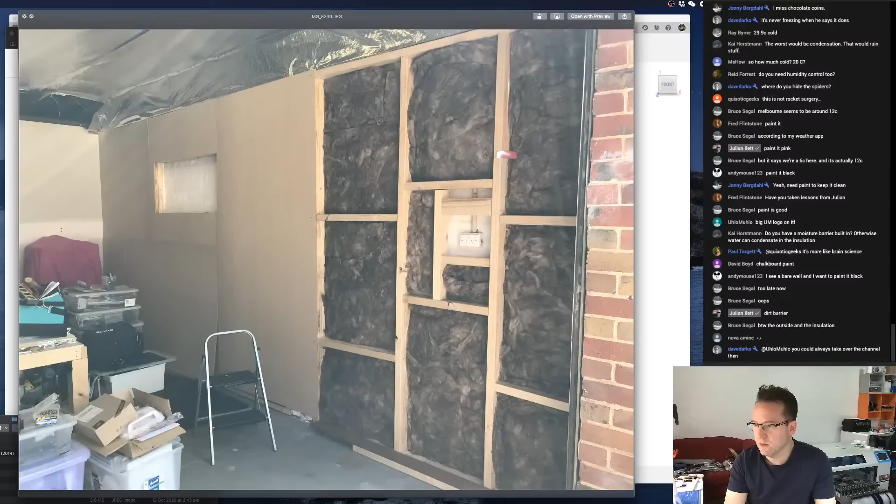So this shelf here was covered with spider webs and spiders. So what I did is Sunday morning I pulled everything off this shelf. It was a pretty big shelf. But before I did, I took out the Mortein. I don't know what you call it overseas. You know, the spray for killing spiders and bugs and stuff. And I gave this shelf a full-on spray down. Even with gloves, there was no way I was going in there without spraying it all first. Anyway, yes, like Raid.

Yeah, so we found one redback in my hammer drill container. I pulled out my hammer drill, opened it up, and there was a nice redback in there. So that was pretty cool. He got squished quickly. Yeah, I don't like spiders at all. Spiders and snakes, don't like them. Okay, anyway, so the renovation is happening. Very exciting. It's underway. Okay, let's talk rockets.

Do you have poisonous spiders in Melbourne, like funnel web spiders in Sydney? Yeah, we have the same spiders. And not all spiders are deadly, I should say. What noise does Sion make when a spider crawls out of his sleeve? Oh, yeah, okay. Your memory's too good, Mark. Too good. I don't love snakes. No.

So anyway, the issue I had with this was it can't run off coin cells because it needs more power. And so we were stumbling on how to power it, right? And I was originally, so let me just show you something. So this is a, oops, didn't mean to leave that on. So this is a newer design, but originally I was looking at maybe Rocket Lab.

Yeah, I'm pretty sure I'd have to pay to get someone to send the Charmhigh to the moon, and I really don't want to invest any money in that, to be honest.

So originally I was looking at how I could fit maybe 3 AA batteries or AAA batteries into it with little holders and stuff, but it was pretty ugly. It wasn't a great solution. And then someone on the stream ages ago mentioned the CR123s, which is this guy. And so I went out and bought some 2 years ago. And I'm pretty sure they probably are dead now. I don't know how long they last for in the pack.

Is there a date on them? Is there a use by? Can't seem to find a use by. Anyway, they've never been opened. So these batteries are 3 volts. They're not cheap batteries, unfortunately, but they're a good sized battery. And so one of the problems with doing the AAs or the AAAs,

what does John Meeking say? WOPR linked launching. Yeah, I could do a fake WOPR launching. I hate them batteries, had them in a home automation system. They died way too quickly.

I guess what they're being, bottom left. Bottom left? Is that, no, that's 1217. Yeah, I don't think those, oh, maybe. Okay. 2027? Okay, maybe. Okay, yeah, okay, yeah, 2027, 12/27.

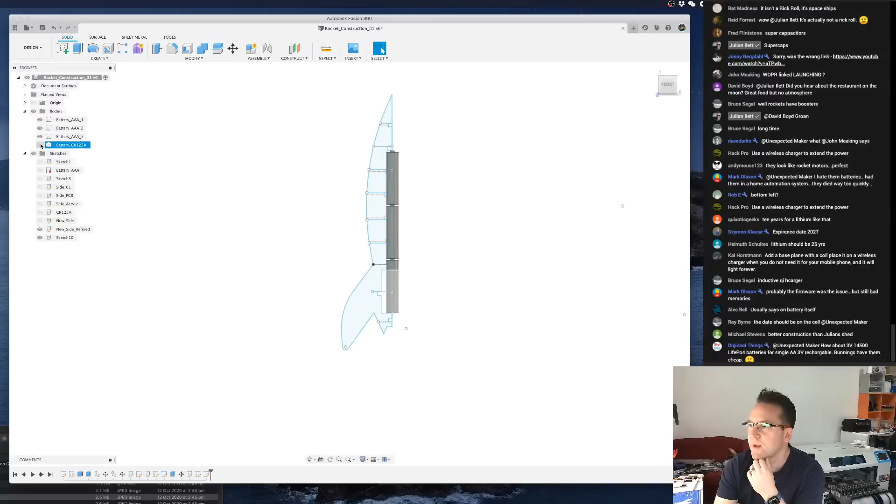Okay, cool. So one of the problems with doing the AAs or AAAs is that the weight of the rocket would have been bad. It would have been possibly too easy to tip over. So what I liked about doing the 123 is that it would be bottom weighted and much easier to build a holder for it. So what I've designed is this. This is the new piece that I designed, which I never laser cut, and I never finished because I got distracted.

Surprise, surprise. How about 3 volt 14500 LiFePO4 batteries for single AA 3 volt rechargeable? So I said again, a 3 volt. Are the 14500s AA in size, are they?

I mean, I don't want to put a charge circuit on this necessarily. I don't know. Look, we'll see. We'll see. Right now, I just want to build. I want to get this finished at least as a version 1 prototype.

So my plan on the stream today is to turn this into a 3D model to kind of show everyone how it's going to work. Because one of the challenges I had, let me just switch over to here, is that having the pieces on the outside that slide in, like this, makes it quite hard to put together. This is my original type of design. Makes it hard to put together. And you kind of have to glue them because otherwise they keep falling off. Then once you glue it, you can't change the battery.

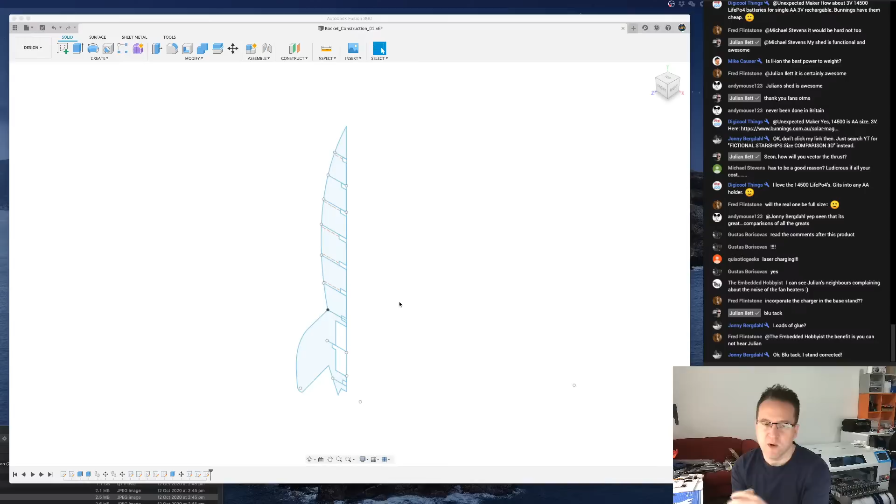Now, PCBs, you can get up to 2mm in thickness. My plan was to build this out of 2mm acrylic so I can simulate a 2mm PCB and then do 3mm cross sections. I don't want people to glue it because then you can't pull it apart to change the battery. That's the problem. So I need to see how I can construct this. So let's start off with... it's a bit of a messy project, but whatever.

So I want that to be in the center. What happened there? I did not hit the wrong key. Okay. So I want to start off by just extruding this out 1mm that way, because I want it to be in the center. So that's a lazy way of doing that. Hey Aaron. By the way, my Fusion 360 skills are not great, so please no one take down notes to learn from this. Okay? Just saying. And that's a rocket slice one, except I can't spell.

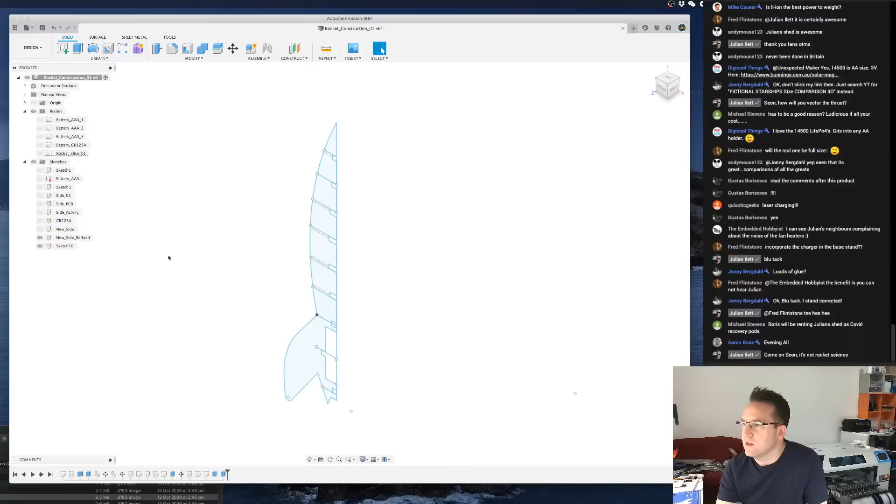Okay, so let's just hide that for a moment. Now, these lines are designed to build the cross sections from. So it's a bit of a pain, but the idea is I can build a circle and then I can rotate it. Come on. And these are going to be my cross sections.

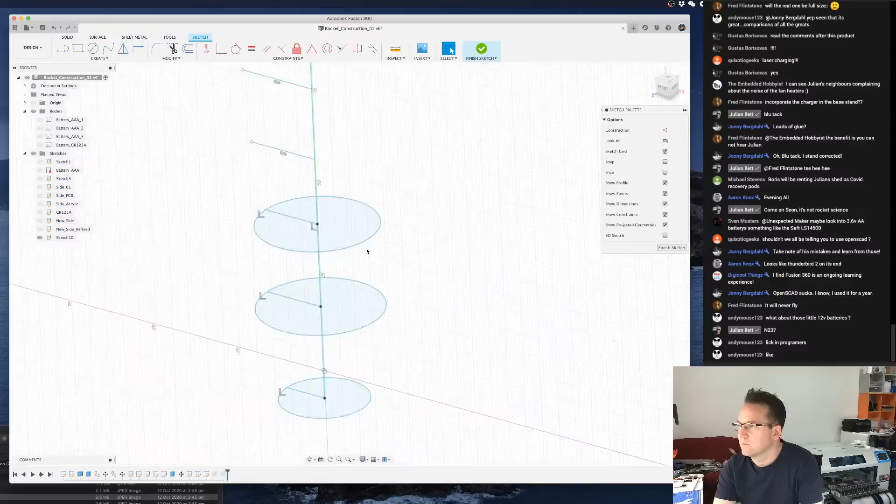Maybe look at 3.6 volt AA batteries, something like the Saft LS14500. They need to be easily found, easily sourced batteries. Like if it becomes either really expensive to replace the batteries or really hard to find the batteries for these, then I don't see why people would care about getting one if it's a hassle. You know what I mean? It needs a gimbal, and no, it's not designed to fly. Would standard 18650 lipos be too big? I'd say so. I think that'd be too big.

Now, I could have done all this already and just shown everyone. Yeah, I'm not going to be using capacitors, no. They've got to be safe. This is designed to go in a kid's room on a bookshelf. You'll also be able to power it from USB as well. But not everyone's going to have power nearby. And it might just turn out that I only have USB power. I don't know. But I'm not going to know until I actually finally get one of these together.

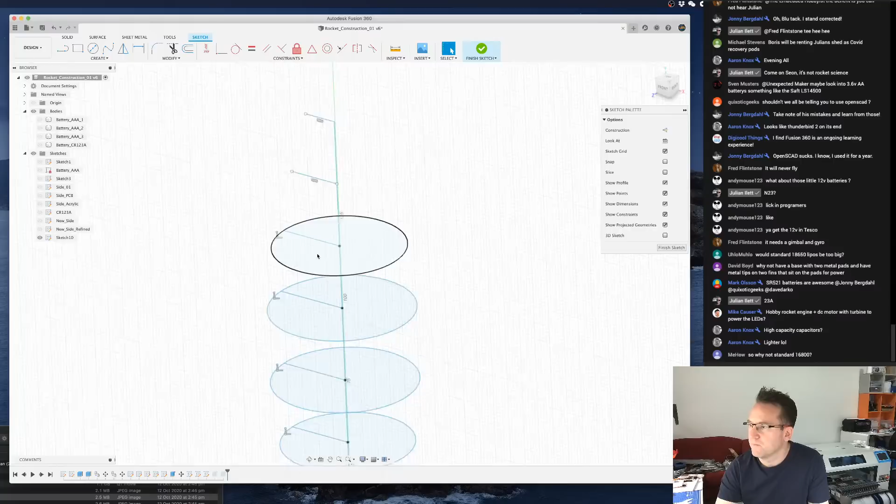So these are all the cross sections, as I keep saying. And I'll show you why I did the lines like I did in a moment, and why I'm building it this way.

Okay, so they're the cross sections for the rocket. And they're designed to be on the shortest side. So these ones on the low side, because that's the shortest point, so that way it doesn't stick out the edge. And these ones are on the high side, so it doesn't stick out the edge, if that makes sense, right? So these need to get extruded down, and these need to get extruded up. And they're 3mm. And this one here is in the middle because that's the shortest edge.

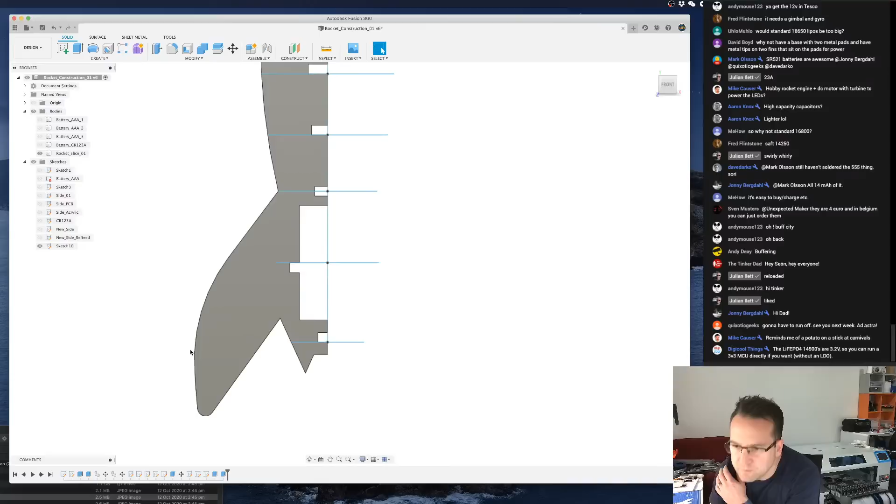Well, I'm going to be using a tiny 85 or a tiny something, so it doesn't. I don't need an LDO anyway because I've got a full voltage range, so that's not a problem.

Building in Southampton. Okay. They do rocket buildings.

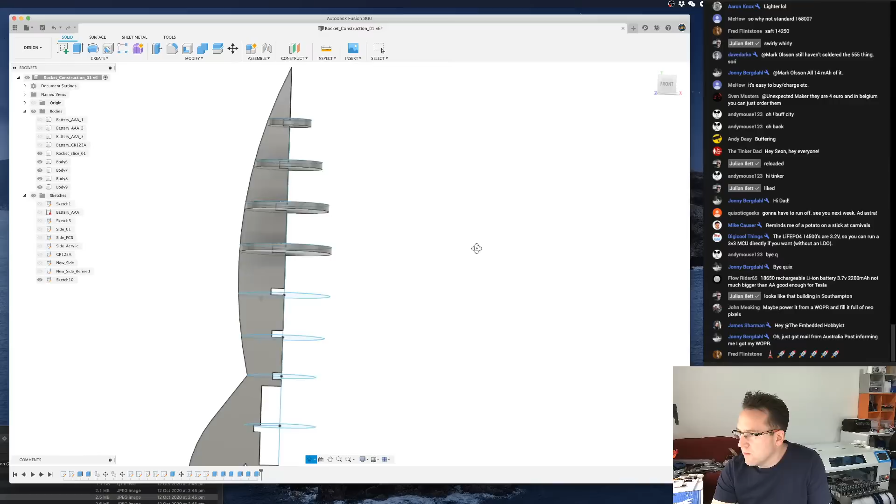Okay, so this needs to be extruded down. -3. Yes, stay on. Can I multi-select and extrude? Actually, I think these two need to go down. No, I can't. Didn't think so. Extrude, -3. Extrude, -3. Now these ones are up, up, up. So 2 ups.

This one is up and down. Extrude 1.5. Extrude 1.5. And wait, what just happened? Oh, I did negative. Extrude negative. Hello. Extrude -1.5. Right, that's better. Sorry about that. This one is down and that one is up. Extrude -3 and extrude 3.

Hope you start a serial MP3 project without an SD card. I'm waiting for this product impatiently. Well, I'm not sure why you're relying on me for that.

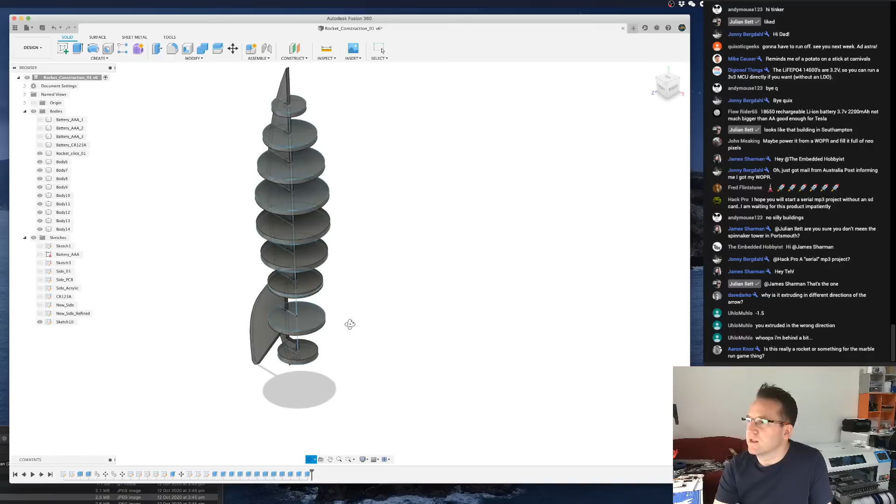Okay, so they're the cross sections. So the idea would be that we just turn all these off for the moment. I should name them, but that's okay. So we do a pattern, circular pattern. Axis is going to be this, that, and we want 3 of them. Is that 3? Oh wow, look at that. Yay.

So turn my sketches off. Okay, so the idea is the rocket will look like this, right? And hopefully I've left enough room so they don't... Oh, I haven't. Right, I'll have to shave them back a bit because they're too close into each other.

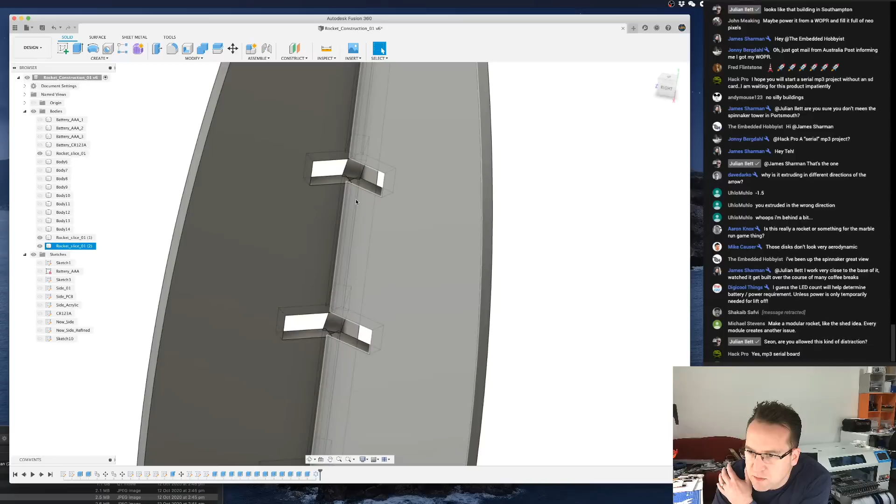Am I allowed this type of distraction? Which distraction? Is this a licensed copy of Fusion 360? Yes, it is. As you can see over here, there's my little... I am licensed. Sorry, I'm missing something. If you need, just at me. Remember to at me if you need. Yep.

Yeah. 3D Christmas tree. It's going to be a little bit small for a 3D Christmas tree. And so the battery fits in here. Oops. In here. And the idea is, well, let me show you. Okay, so I'm just going to turn these rocket slices off for the moment. Can I move you down here? Okay, so they're the rocket slices. Now, this one is for the battery. So the idea is that this ring would sit around the battery.

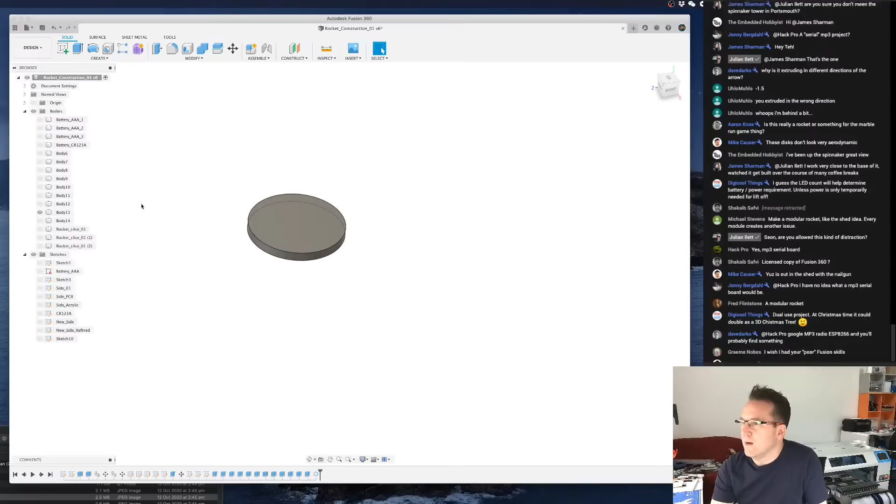I've lost my train of thought. You wish you... Hey, Graeme. Oh, no, my Fusion skills are pretty bad. They're pretty basic.

Okay, let's take a step back. So, the idea is that... I've got to remember how to do this. How do I do a boolean? I don't want to do a combine. Can I do a negative combine? Join. I want to cut. So the target body is this one, just to show you, right? And the tool bodies are that, and that. And I want to keep the tools.

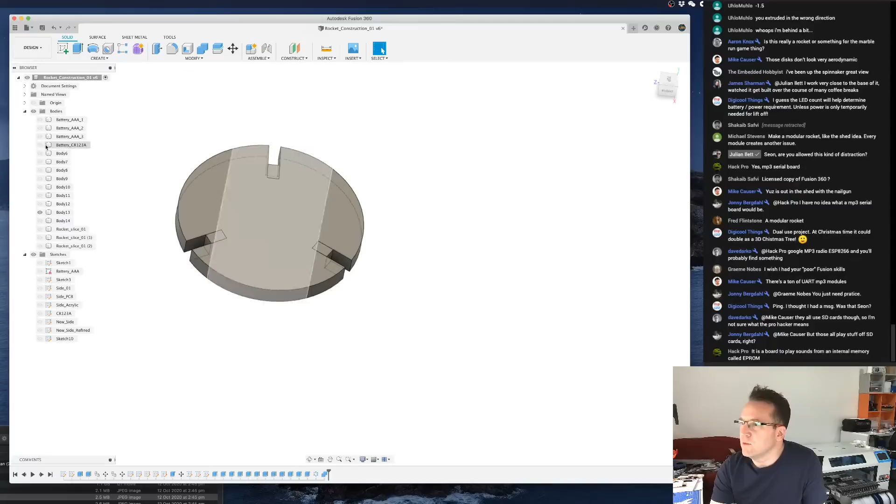Okay, so now I have this shape here. So obviously, I was a little bit out on one of my lines. That's okay. So the idea is that this would sit like this. Let's do that again. My target is this, and my tool is this. So that would be the shape where the battery sits, and the rocket bits slide in to the sides like this, around it. And the battery sits in the middle, so it holds the battery in place.

And what I do on the PCB, so one of these is, let me just, hang on, make this easy for now. Hit A for appearance, and I'm going to, plastic, what plastics have I got?

Where's my colored plastic? Here we go. So, ooh, FR4 is a plastic, it's not plastic. So if I made, just for argument's sake, if that's the PCB, and I'll make the other bits black for now, okay? Just so we can easily see.

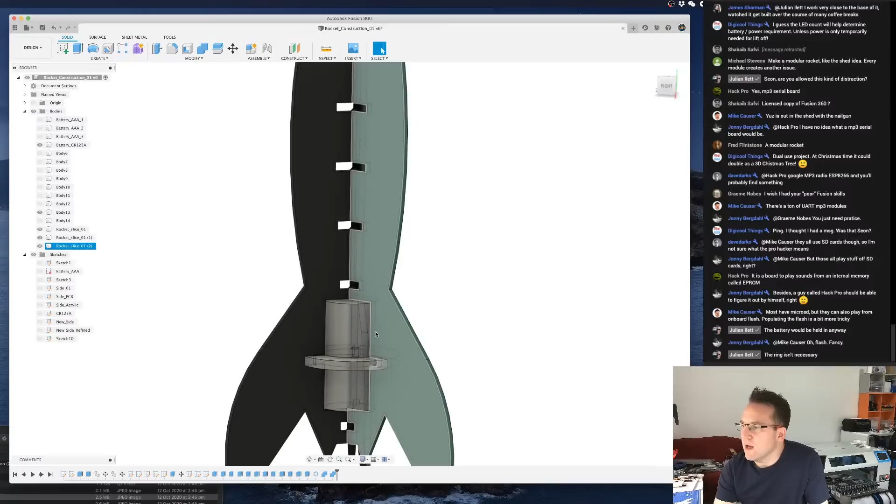The ring isn't necessary. It's necessary in terms of holding the rocket together. It's not so much about holding the battery. Yeah, you'd have to dismantle it to change the battery, which is why it can't be glued together, right? So the idea would be that on the... so that's rocket slice 3 PCB.

This one's the PCB. So the idea is that on the PCB version, right, I'd have something here that would have contact for the battery. So it could be something you solder on. Bad idea. So you would have to... Why is it a bad idea? Not wrapping the rocket.

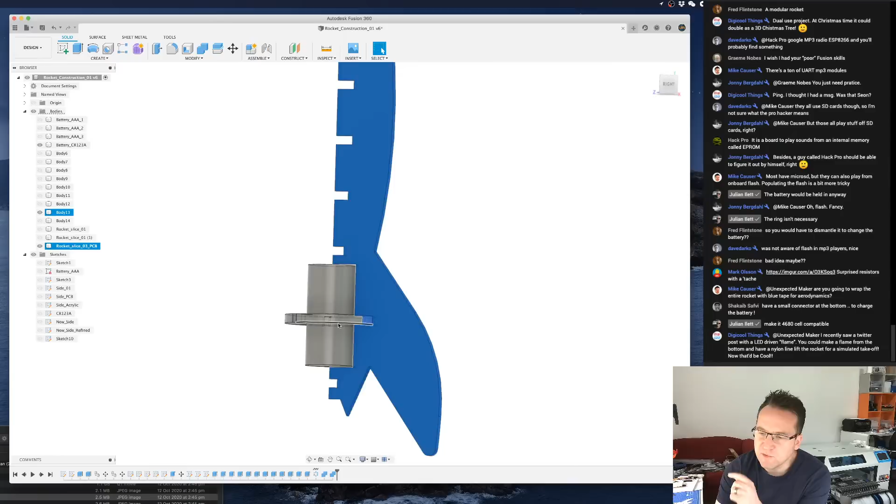So depending on what battery I put in there, if I end up putting a rechargeable battery, sure, then it can just be charged. I'll have a look at those batteries that Greg showed later, and it's easy enough to change this to get a different battery in there, right? But it's going to be the same premise. Either way, it needs to hold it.

Now, if I end up doing a rechargeable battery, then the problem is I obviously can't ship batteries with the kits anyway. People are going to have to buy the batteries. They have to buy the right battery. If they put a wrong battery in there and try to charge it, that's going to be a problem, right? So charging battery is not going to be easy. What happens if they put the wrong battery in and they try to charge it and it blows up? So my plan was always to not have charging and to just make it a swappable battery.

No, it will be my problem, Julian, because I'm not prepared to sell something that allows people to hurt themselves, especially if it's for kids. Okay? It's not something I'm keen on doing. Like, I could see this running out in Flynn's room and Flynn going to find a different battery to put in it, right? And Flynn puts a different battery in, it's not the right battery, it's not working properly, and he plugs the power in, and... Poof. So, yeah, not going to happen.

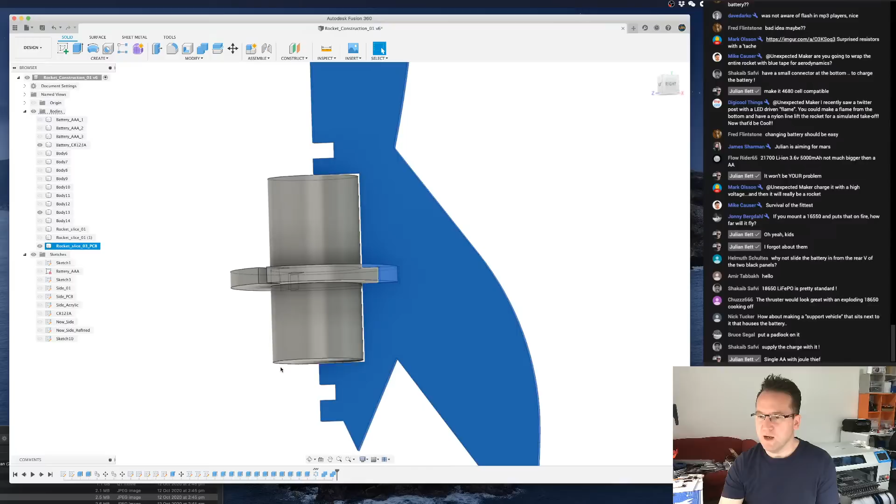So, top and bottom of the PCB, there'll be pads on front and back, and I'll ship it with some bit of metal or something. 18650s are not standard for kids and kids' toys and things that go on the shelf. Thanks all, but don't try to convince me that putting a chargeable battery that someone has to find themselves is necessarily the right way to go. So it's just not something I'm interested in doing right now. This is a shelf product. It's not designed to fly. It's an RGB rocket that sits on the shelf.

Okay, so let me just make some more pieces. What did Helmuth say? Why not slide the battery in from the rear V of the two black panels? So slide it in from the rear V. How do I slide it in? Sorry. It's got to hold the battery in place. How do I slide the battery in and have it enclosed on the bottom?

Does this look like it's designed to fly? Seriously, folks? This doesn't look like it's designed to fly, does it? It's like an old retro-looking rocket. I just realised that isn't going to fly. I was waiting to find out how you were going to make it have thrust.

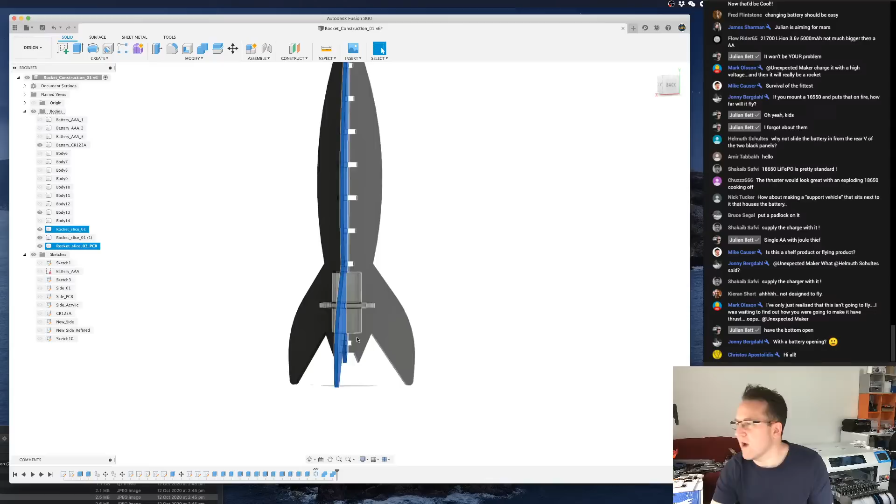Well, firstly, if I have the bottom open, then how does the battery stay in place? And how do I do some really nice lights on the bottom for, you know, take off? Might fly if you charge the wrong batteries, yeah.

Have the disc open to the width of the battery. Right, but it still won't slide because the width of the battery here, cross-section, is wider than the openings for the two pieces. So even if I open them up, I'd have to open these up much further, right, to slide the battery in. What's stopping the battery from falling out?

And I want the PCB side to be the side that's hidden. I want it to look like that, where the PCB's at the back, because that's where the electronics stuff's going to be. So I don't know how the battery would stay in there. I don't think it's a problem having to pull it apart to change the battery. I mean, you go buy a remote control car and the batteries run out and you've got to get a screwdriver and pull it apart to change the batteries. I don't understand what the big deal is. It's not 50 pieces, right?

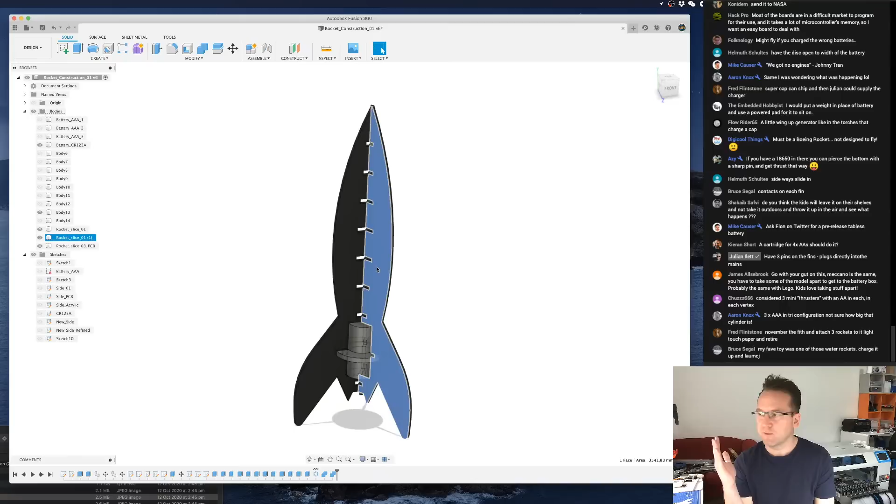Yeah, like it should be as easy as pulling. If my design works, it should be as easy as pulling one panel off, one slice off, taking the battery out, putting a new battery in, putting the slice back in. So, yeah, I don't want to use 3 AAAs.

Pierce the bottom of the battery. How will the lights work? What do you mean, how will they work? Okay, well, I'm getting to that, but everyone's caught up on the batteries, on the battery. So,

well, there's no battery holders. Not that I've found, there's no such thing as a battery holder that wraps around a PCB on each end. I don't know how firm that's going to be. I don't think it's going to hold the battery well. Again, having something where the battery isn't secured and can fall out if it gets knocked or whatever isn't really something that appeals to me either.

Anyway, folks, let's move on from the battery because, other than putting a different type of battery than this particular battery, I'm pretty set on this is how I'm going to do it, at least for now. So we're going to move on. So what I need to do is basically do all of these. I need to cut out all of these pieces, at least for now.

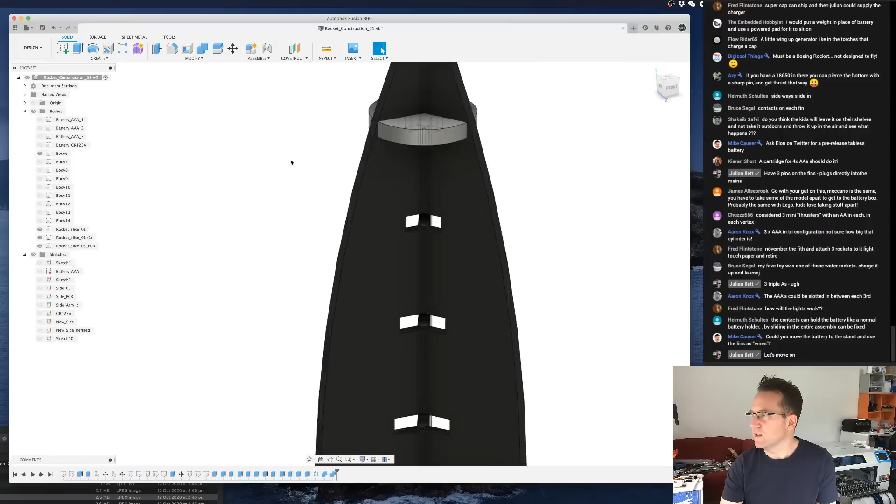Wish I knew what the keyboard shortcut for combine was. Okay, target. Actually, maybe I can target them all at once. Hang on. We'll try this, see if I can cut them all at once. Combine. Target. No, can only do one at a time. Well, that sucks. Okay. And again. Isn't there a key in Fusion that says repeat the last thing? I'm sure there's a repeat last. Anyone know what that is?

You can't get the ring around the battery out if you only move one slice. Right, but I might have an opening on the ring. That's the thing, possibly. I don't know, I need to put it together. There's other things I need to work out, like how I'm going to lock them and some other stuff, but let me just cut all these out first. Because there's more work to be done other than just that.

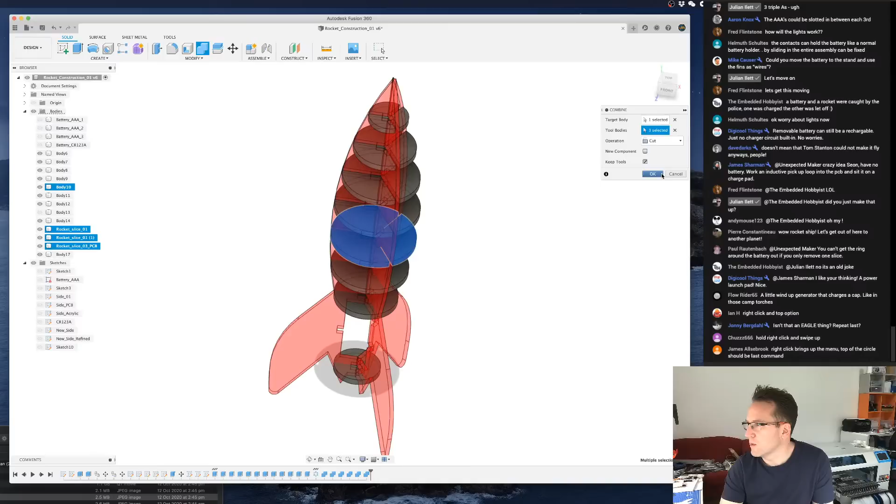I'm sure there's a repeat last. Repeat. There's a repeat here, but I'm sure there's a thing for it. Keyboard shortcut. No, it's a Fusion thing. Well, it's both. It could be comma. Maybe. I'll try comma on the next one. Is it comma? No. Full stop? No. Damn. It's one of them.

Crazy idea, Seon, have no battery, work an inductive pickup loop. Well, I thought of having no battery and just having USB power, and that would solve it all, right? But I can think of plenty of situations where it's up on the shelf and you can't get a cable to it. Right click. Yeah, I know I can right click and do it. I'm positive there was a keyboard shortcut for it. I just can't remember what it was.

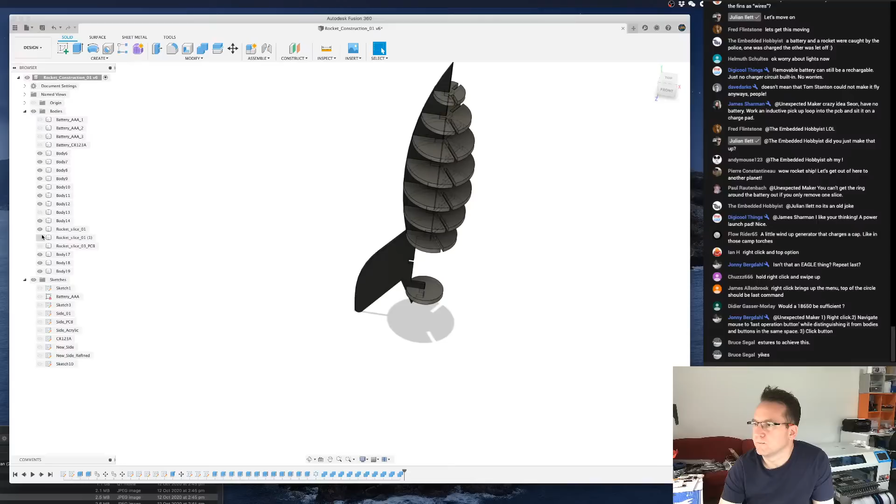Okay, lucky last. Oops. Okay, so they're the... Oh, that didn't work. What happened then? Combine. One, 2, 3. Why is it not letting me cut that one? Oh, it's not selected. Oh, weird. Okay. I should really save this. Save, save, save. We're all power obsessed.

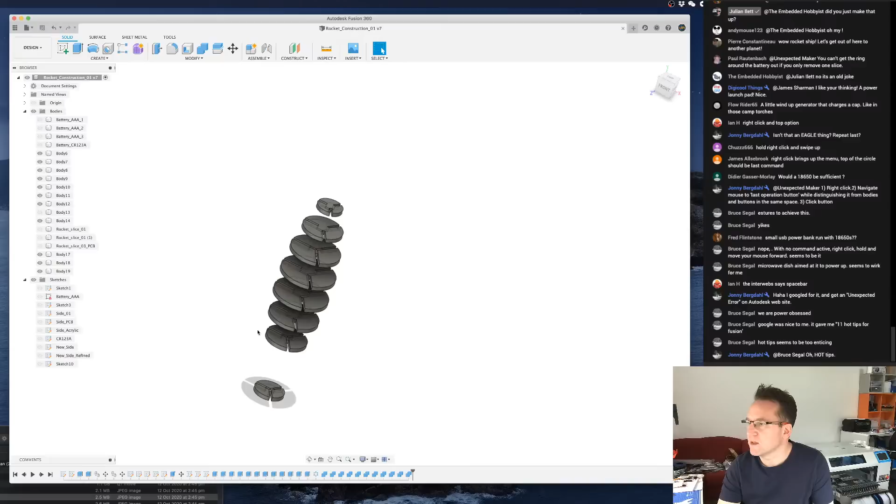I think it's just a question for maybe another time. So yeah, clearly my gaps weren't exactly 3 millimeters, but that's okay. So how do the lights work? I'm glad you asked. I will show you. You extruded down rather than up, so nothing. No, I just hadn't selected it. That's all. It wasn't selected.

So I'm going to, hang on, appearance. I want a, ooh, glass. Smooth glass. Clear glass. Might not be visible though. Maybe grey glass. Window glass, just for now. So these will be transparent acrylic.

Just get them all on. And where's that other one? That's also... okay. In case you're interested, this is what I've been doing during the stream.

Okay, I'll have to look later. Sorry, Mark. Make lights work. I will. I'll show you how they work. I'll show you. I'm getting there.

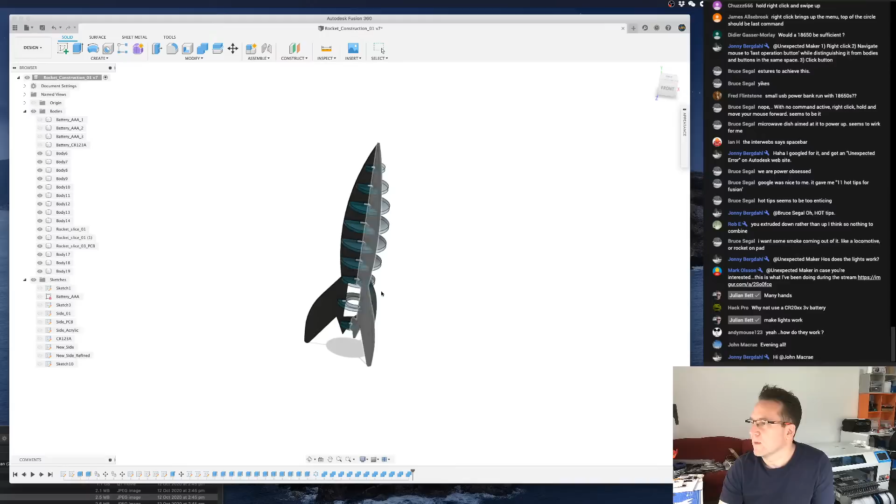Okay, so that's the rocket. Now, on the PCB, so let's go to the PCB version. Let's turn all these off, except for one. Not that one. Which one? We'll do the big one. Okay, so let's look at the PCB. So, the way it's going to work is, I'm going to save. Always save. I'm going to create a sketch on the PCB.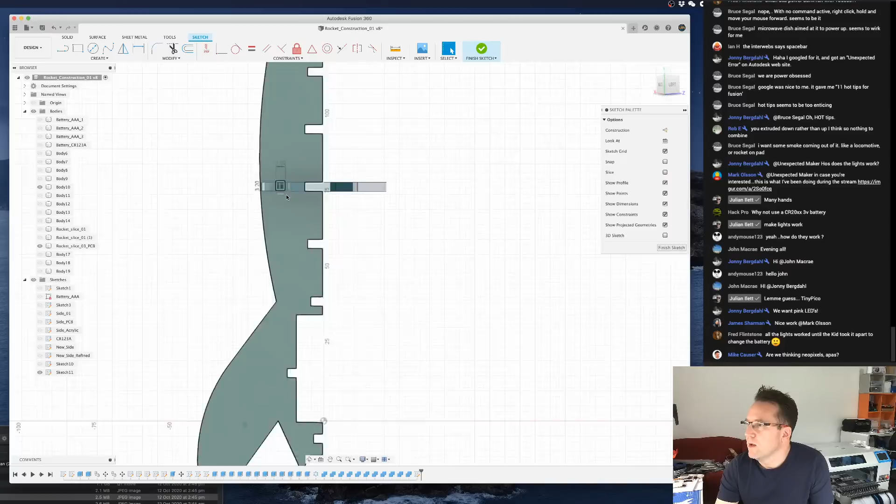So, most of the electronics are going to go on the fin over here. Right? And then there's going to be, I need a rectangle, and it's going to be, I think they say they're 3 by 3, but they're actually not. They're, I think, 3.2 by 3.2. And move this in place. It's going to be wherever it is, doesn't really matter. Just call this PCB electronics.

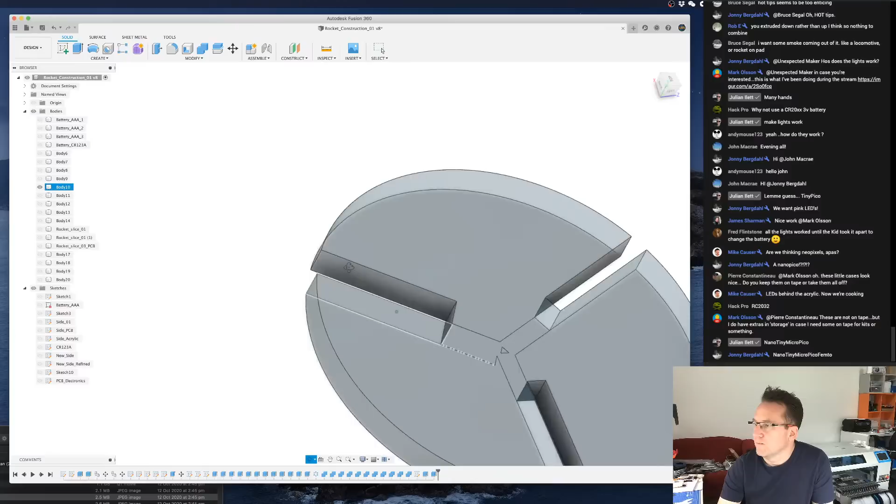Okay, so that's an RGB LED, believe it or not. Okay, that's an RGB LED, and which one was it? That one. So the idea is that this face here is extruded back a little bit like that, and then there is an LED that sits there and it side lights the acrylic, so it edge lights it. So it'll light up and you'll get edge lighting around the outside and through all the edges of the disc. Does that make sense? I hope so.

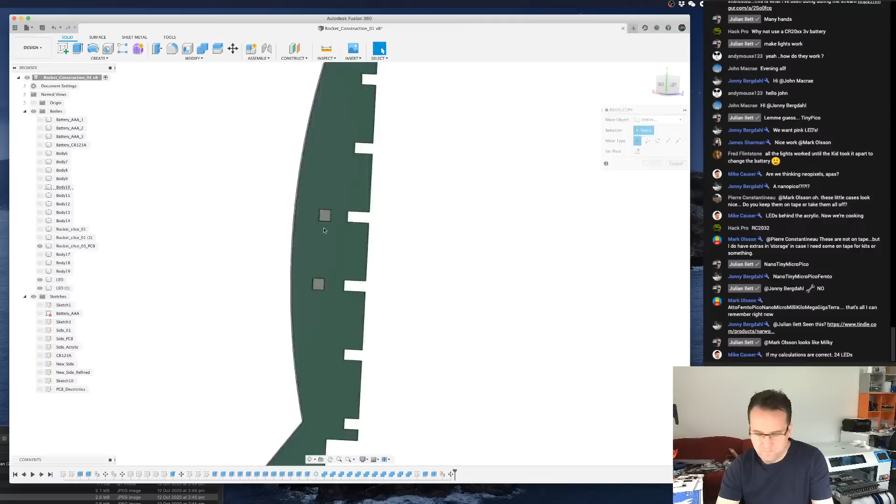So basically, I should have used one that was on the correct face. Damn, silly Seon. I should have used a different faced one. But if I take that, so there'll be one there, there'll be one over there a bit. There'll be one over here. Try that again. Oh, come on. Create copy. There'll be one over here. Right, all the way around. It's gone through, hasn't it? Yeah. I should have done a different face as the PCB. Anyway. Does that make sense? So every ring will have a light.

Will the light travel through the cut circle or just reflect? It'll edge light it. Let me get some acrylic. Won't be a moment. Actually, I just realised I have some acrylic right in front of me I could use. I have made some more plates for my next test jig. So if I just peel this off, I'm going to have to find some RGB LEDs now. So satisfying doing this.

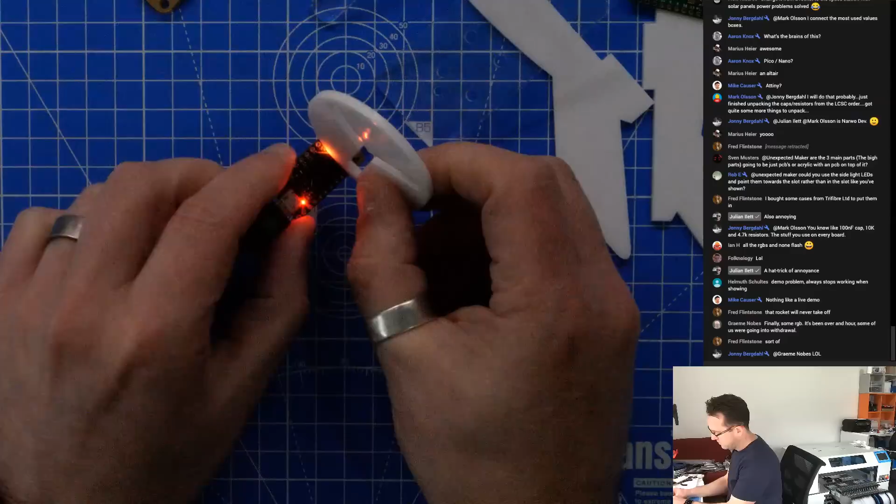I need to turn the lights down. So obviously it really depends on the angle, right? But if it's a circle, it's going to spread around much better. You can see that the holes in the middle are lighting up better than the straight edges are. If that makes sense? So straight edges don't do very well, but the curves do. And obviously this is pretty massive. These don't light up, unfortunately. So yeah, you'll be able to see an outside edge.

And where's that other piece I brought in? Right, here's another edge. You can see here. Just peel this off. But I can also spray them like I did with my Wi-Fi clock. The edges, and frost them, because the frosted edges will show up even more. You see that? So, yeah. The curves work better.

Did we all lose the stream? What? Is it working okay? I mean, it's all quiet here.

Okay, cool, it's fine. So anyway, that's how it's going to work. That's the idea of the edges. So that's why I want to go black PCB, black acrylic, I think. Not white, because I don't think that the acrylic will light up nicely against the white. But it might, I don't know. I can try different things. But anyway, yeah, that's how they're going to light up. The rings. And doing different patterns.

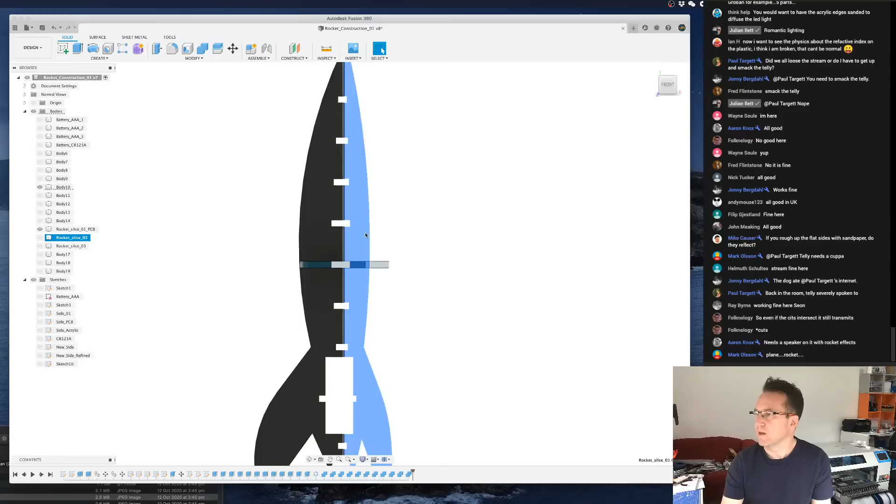So even if the cuts intersect, it'll still transmit. Yeah, it will. It does. That's what acrylic does. Now, frosting the edges of them. I wonder if I have a frosted one. Hang on. Do I have any old? Maybe. Oh, I do. My last one. So if it's frosted, it looks like this. It's just a pain in the backside to frost.

Let me take the plastic off. Not the plastic, the paper. Frosted looks way better. But it's time consuming to do because I have to spray paint them. So that's what the frosting looks like. It makes it work even better. So, you know, I have that as an option as well. But I think it'd look really cool. I'm positive it's going to look really cool.

So do you etch the edge for the frosting? No, I spray paint it with frosting spray paint. It's a real pain. So these are the segments that used to go into my RGB Wi-Fi clock. I used to laser cut hundreds and hundreds of these. Like, I don't know, probably did about 2,000 of them.

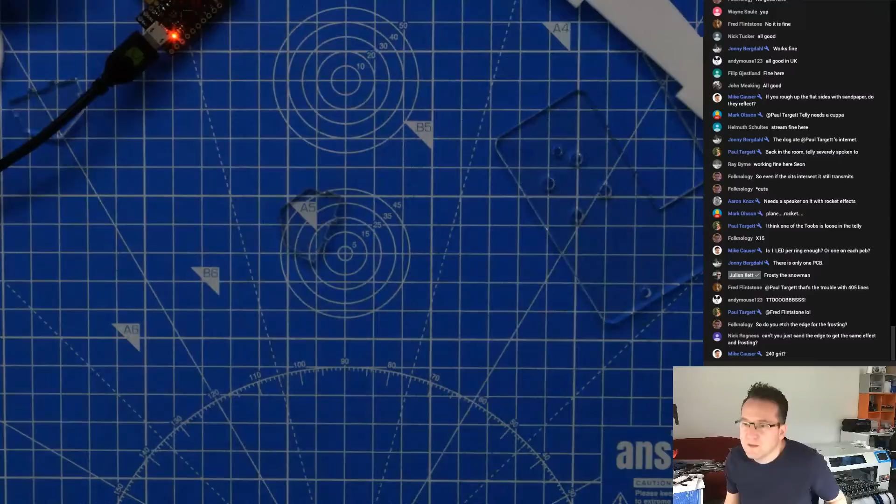And had to lay them all down on card and actually spray them with spray paint. It was a full-on process. I mean, the end result looked fantastic, but it was way too much labour. And so, no, you can't sandpaper them. It's 10 times quicker to spray paint them than it is to sandpaper them. And you can't get consistency with sanding them. And you get issues on the corners and the edges and stuff like that.

There are places you can go and they'll do it for you, but it's horrifically expensive. Horrific. I tried all the different options for doing it, and at the end of the day, spray painting with frosting spray paint was by far the quickest and cheapest way to do it.

I don't know if you already answered it, but are the three main parts, the big parts, going to just be PCBs or acrylic? One is a PCB and two of them are acrylic. So I should go and recolor these. So in this example, that's a PCB, and those two are acrylic. I just made the PCB green for now, but it'll be black.

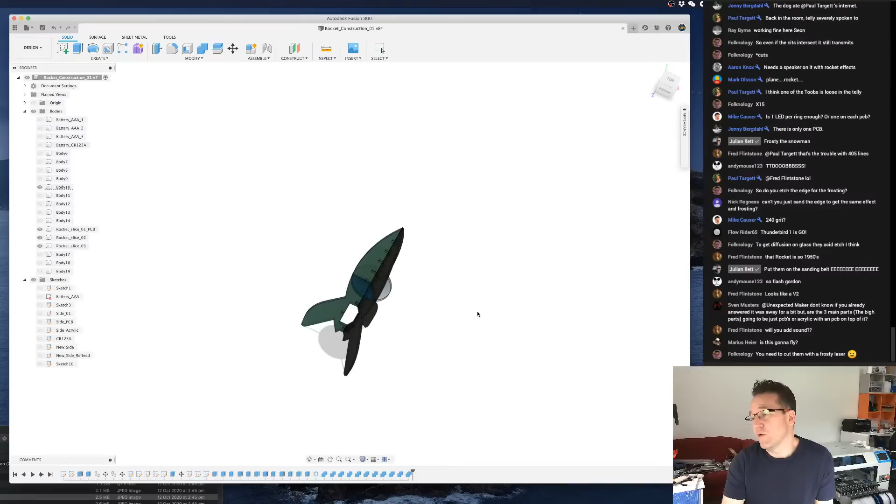A frosty laser. Is that even a thing? That'd be awesome. No, it doesn't fly. Will you add sound? I could add sound. I don't know if people are going to want rocket sounds coming off their shelf. It's supposed to be just like a night light, a glowing night light. Would you add a blinky pink LED on the top? No, it's not a Christmas tree. Sorry.

Okay, so we can go back to here now. I'm going to save. Fusion crashes a lot for me. Like, a lot. Okay, so let's go back and do the electronics. So I'm going to use the... actually, they're 3.5, aren't they? So 3535. So I'm going to use the 3535 RGB LEDs.

Keep jumping back and forward, sorry. Which are these ones, the ones I use in my Neo 7 segment. These ones here, that size. And the acrylic is 3mm, so it would sit over the LED like that, where pretty much the whole LED face is sitting inside the acrylic. If that makes sense.

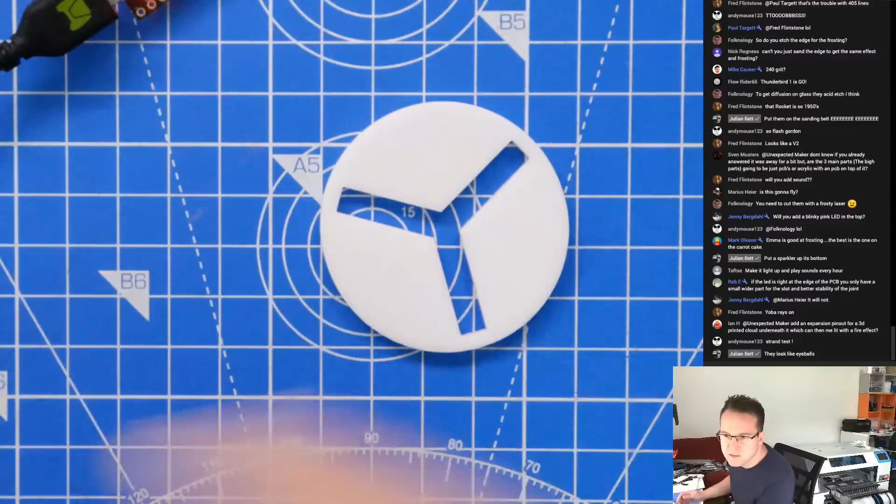3D printed cloud. Ooh, hey Ian. I can definitely make it expandable, like people can put stuff on it if they want to. They look like eyeballs. What looks like eyeballs?

So LED. There'll be one there, and then there'll be one there-ish. And there'll be one. God, I keep zooming in the wrong direction. There. Oops, I missed one. Or did I not copy and paste it? Oh, I didn't copy and paste it. Try that again. Sometimes Fusion is just really frustrating. Anyway.

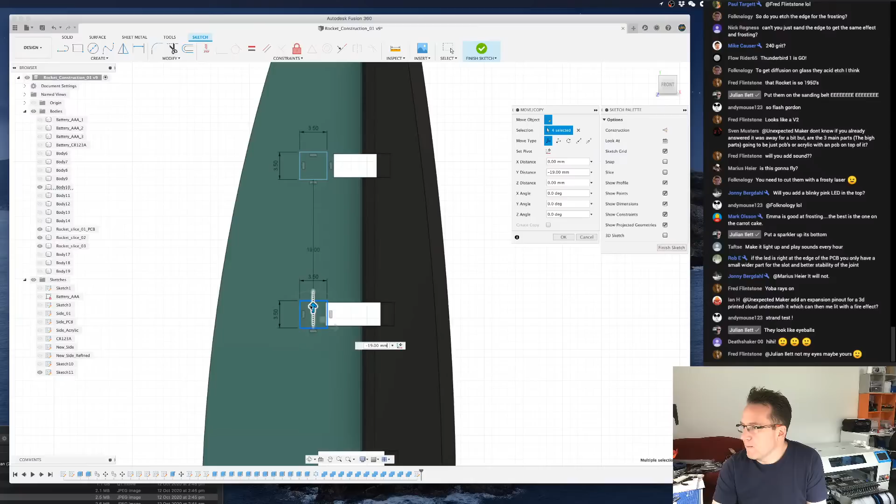Your heating's gone off. My heating is on, thankfully.

So my concern now is that I'm going to do all this. I can't get to my laser cutter right now because of the garage. It is piled on with stuff. My concern is I'm going to do all this and then I'm going to not abandon it, I'm going to, what's the word? Like the renovation is the most important thing I could be doing right now, even not building stock. I'm out of Feather S2s again, and those of my patrons here know that I ran out twice already since the weekend. Well, I'm out again.

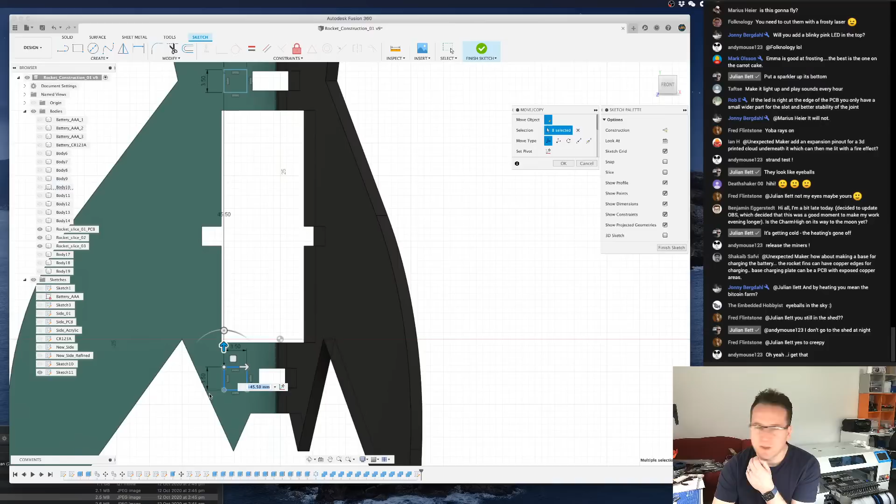So now I was thinking that I don't know if I want to put one on around the battery. I'm definitely going to have one here because I want this to be the... And I might do a custom acrylic piece here instead of a disc. I don't know how that would work. Very centered.

Can you add phasers? Wait, what's scary? Oh, you don't go to the shed at night. You don't have a spider problem there, do you? I don't think you do.

Bottom disc for the flames. Yeah, that's what it's going to be. So this bottom one could be doing fire, flamey thing, where the other ones could be flashing something else. They're just addressable, so I can kind of do what I want with them. Maybe I'll stick one here for now, next to the battery. Okay, so it'd be something like that. Oh, I hate how Fusion does that. Anyway.

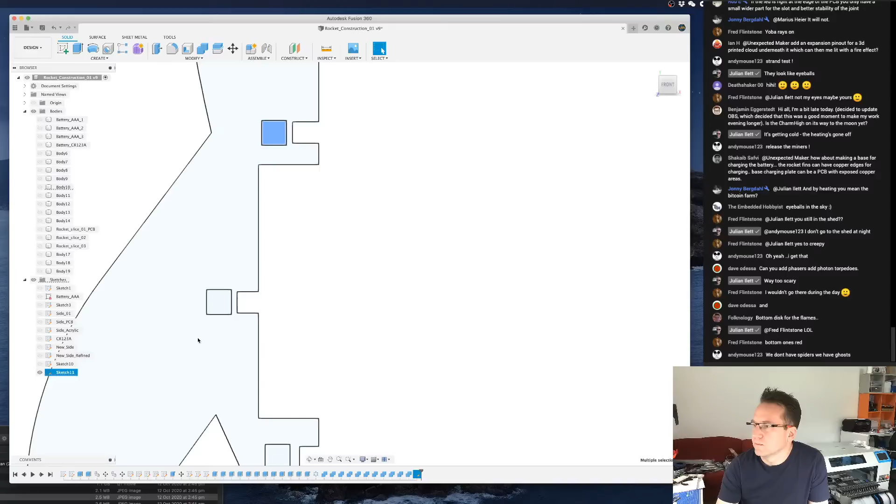Extrude 1.2. This could be a lot of little shapes. I'll worry about that later. I'll clean all this up later. But they'll be on the PCB like this, and the idea is they'll be behind, so you won't see the point lights. You'll just see the disc. Alright. So if there's a USB connector, it'll be on here, on the side here. There'll be the Tiny 85 or Tiny whatever I put over here. There'll be an on-off button. There'll be, I guess, a reset button or something.

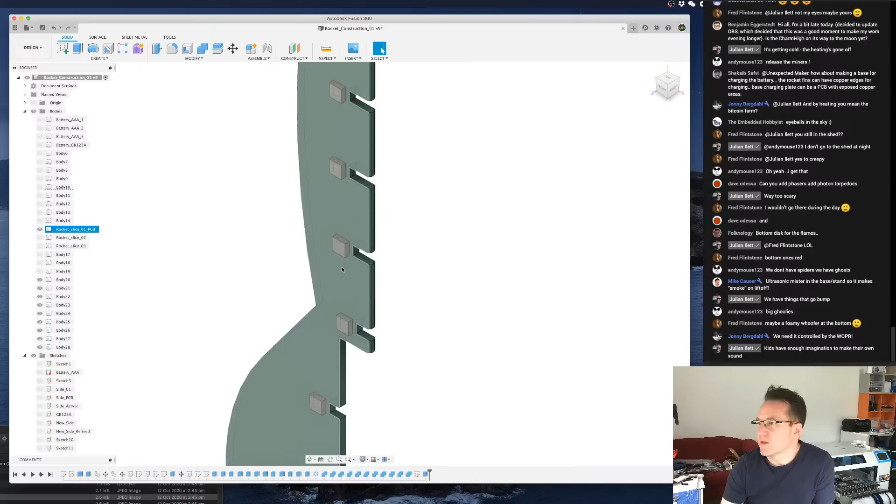I don't know about sound. Yeah, I'm not convinced about sound right now on it. Maybe I can leave a spot for a plus or a minus, like for sound, if someone wants to put one on there. We need it controlled by the WOPR. Well, then it needs to have Wi-Fi or Bluetooth, and that's going to be quite a hard... So the idea is this to be a kit. So I'm going to have to make very large pads for the LEDs so people can hand solder them.

And okay, so that's the other thing. So Julian, you've nailed the reason I want to have a battery on it, because I reckon kids will run around like Flynn would run around the house with this thing lit up, and you can only do that if there's a battery in it. Can't do it if there's a cable hanging out of it. So yeah. I've got to rename all these. So this is kind of what it's going to look like, if that makes sense.

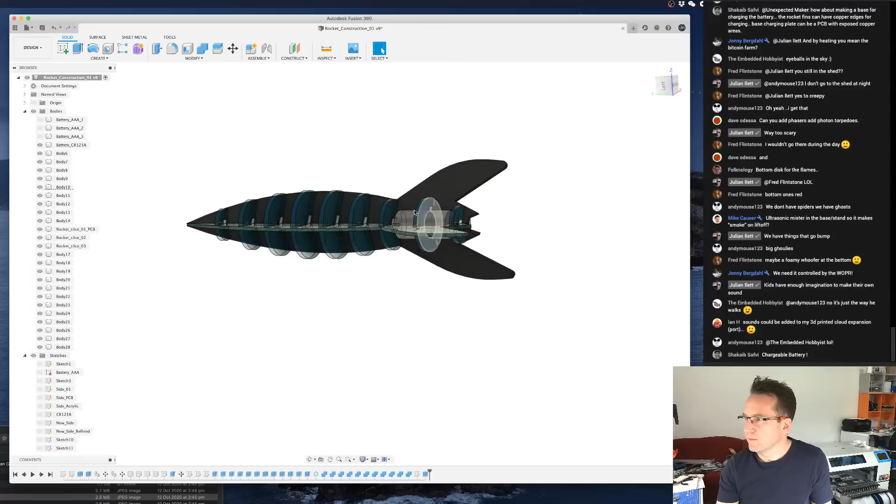I don't know whether I'll extrude them or whether I'll actually cut a little divot out of the disc. So I'm hoping that with all of these, the way they slide in, and with enough of these discs, that they'll all hold in place. You know what I mean? That there'll be enough friction holding it all together. Divot would hinder assembly. Yeah, possibly. It might need to be a divot that sticks out and then comes. Yeah, probably will. Good point, Wayne.

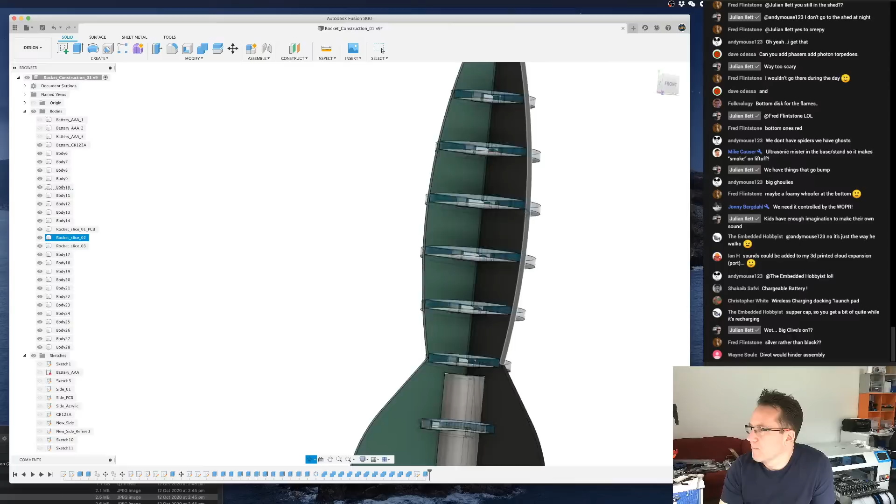I just think that looks really cool. I'm not sure about the black, though. But what other colours? PCB colours are a problem. White or black, blue, red. Red could look cool. Red rocket could look really cool with red acrylic. Yeah, you can't get silver PCBs. And you can't really get silver acrylic edge. What does edge mean?

I mean, the acrylic pieces can be transparent. Like, they can be this type of... that was a little bit dusty. It could be this type of thing. I'm just not sure if that would lend itself to the lights or not. Red mask and ENIG art.

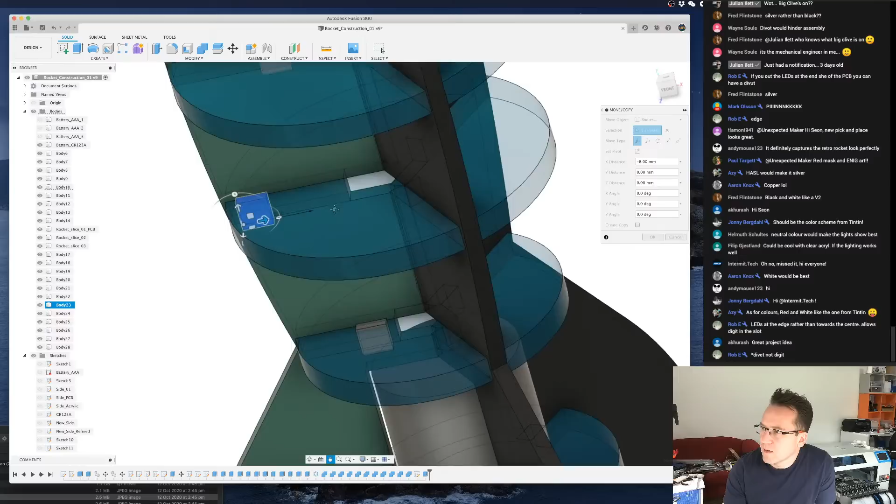But let's just pick one there. Like, yeah, it could be that one here. Maybe there they could be. So the biggest problem is going to be that there are 1, 2, 3, 4, 5, 6, 7, 8, 9. 9 RGB LEDs. That's a lot of milliamps.

Star zooming planets with the same cutouts in the acrylic bits. Yeah, I don't know if this should be a PCB art project. I don't think so. I think any detail I put in the acrylic and on the PCB is going to detract from the lighting of it. I'm really thinking something simple, or if I do anything at all, maybe some of these circle type cutout things, I don't know. I'm not convinced on cutting stuff out of the shape yet.

$499 for a tin rocket, a Tintin rocket.

What? Where's a Tintin? Do serial LEDs use more power than RGB ones? They technically use less, but they are much harder to control. I've only got a few pins, like Charlieplexing. I wouldn't have enough pins to Charlieplex normal RGB LEDs, non-addressable.

So it's a binary clock. 1, 2, 3, 4, 5, 6, 7, 8, 9. No, not quite. Don't you need 10? No, I don't need them all on at once. But even when they're off, it's not a lot, but they all draw 1 milliamp each. So you've got 9 milliamps just sitting there with them all off, with power on but showing no color.

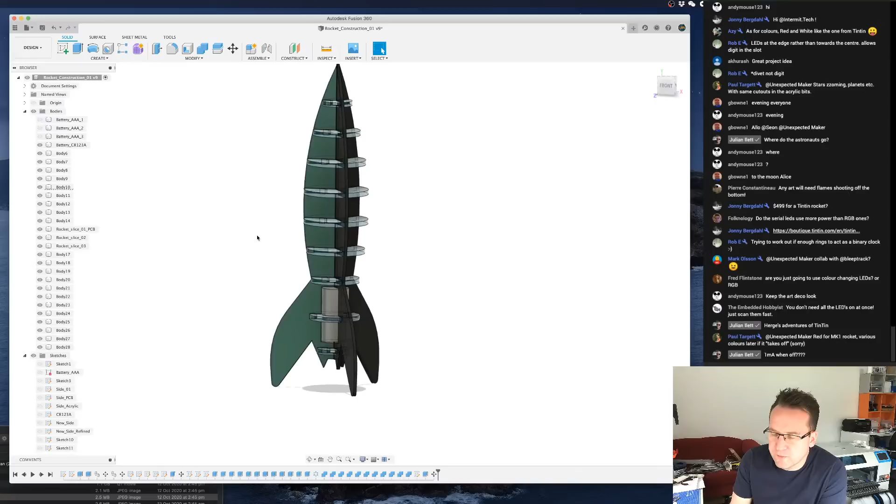I thought about sticking an LED driver on there and driving just individual RGB LEDs, but I'm not convinced that's the right way to go either. Yes, 1 milliamp when off. All of these addressable RGB LEDs, even the APAs, take 1 milliamp when off. It is a lot, yes. So, something to keep in mind.

I don't know how long these batteries would last. You might turn it on, put it on the shelf, and only get a day out of it. Who knows? Which is why there has to be a USB connector on it. And which is why I might just end up with no battery at all.

Now the question's going to be whether I can redesign the bottom so the battery gets inserted from the bottom and can easily come out again. So maybe this bottom disc doesn't work this way. Maybe it connects up. Anyway, that's a game changer because of the battery. Yeah. Yep.

90° USB connector. Why 90°? Why wouldn't you just have a USB connector that's sitting here, pointing, so the cable comes out the bottom here? I think that's the way to go.

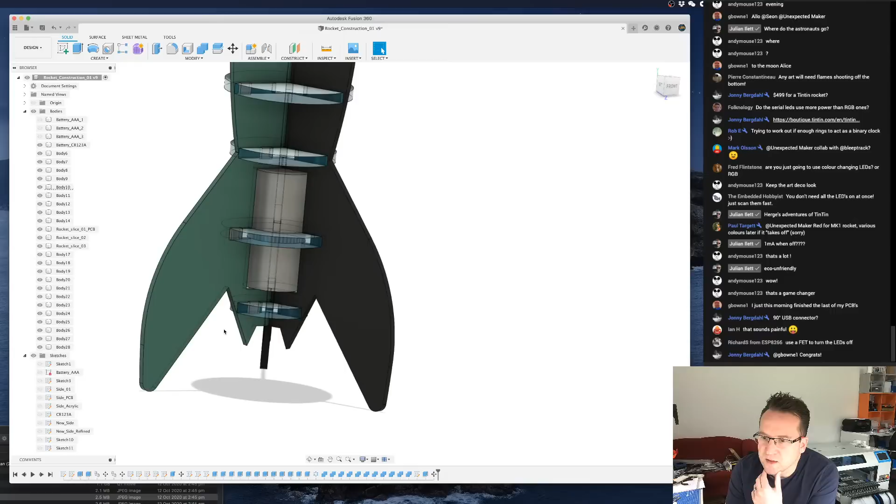I can't use a FET to turn the LEDs off. They're addressable LEDs. When I send a signal to say go red or go black, how does the FET know to go on or off per LED? I'd need 9 FETs, and the data stream, yeah, no. FETs won't work. I mean, there's a whole on and a whole off thing.

And obviously I can stick an LDR or an ALS ambient light sensor on here and only make the RGB LEDs come on when it's dark, so they won't get wasted during the day. Pogo pins at the base station, rocket sits on with a rechargeable battery. Right, that's something we discussed 2 years ago, that it could be sitting on a base and it could work that way, absolutely.

Going to use one of the tiny chips. It was originally going to be an ATtiny85, which I've got a stack of, but it might be a different one. They're pretty low power, and they have a huge voltage range.

When the kid picks it up, it switches on. So I could put a FET on there, and the battery only works when you lift it up. And when you plug it in, it runs off the base plate. But again, then there has to be a cable for it. Which, look, it's not unreasonable to have a cable, but then this kind of has to go on a desk as opposed to maybe a shelf.

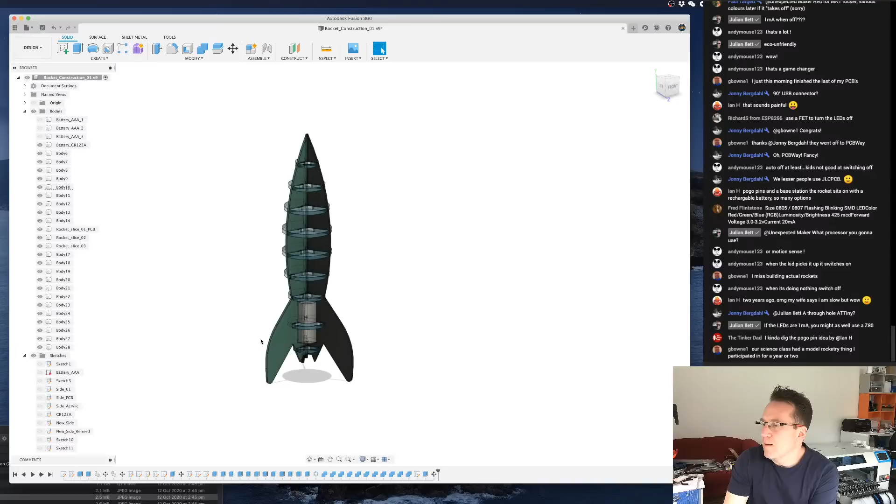I kind of dig the pogo pin idea. Yeah. Well, it probably won't be pogo specific. Maybe. I don't know. Designing a base though then is going to be a problem, and then the base, you'd have to put it in one way.

Actually they weren't dusty, no, because I kept picking them up and looking at them and putting them down and moving them around. I've never dusted them, but they're pretty good.

So yeah, the orientation would have to be perfect. Like you'd have to put it back in keyed the right way, because the PCB bit has to be in the part where the charge comes from. Hey, Alan. And that's going to make it a much more complex thing. But yeah, maybe it can work that way. And if that's the case, then it doesn't need a super big battery. It's still an issue of... I don't know. It'd make it a much harder thing, because the idea was supposed to be a kit. So, does the base come as a kit?

Well, yeah, you'd have to key it, Andy Mouse, to make sure it can only be plugged in one way. But kids kind of brute force things, don't they? Yeah, the idea was that it comes in pieces, and you solder the PCB together, and then you assemble it. It was going to be an electronics kit that happens to just be a rocket. Whether I sell them pre-assembled or not is a different story, but the idea was that it would be a fun kit to build.

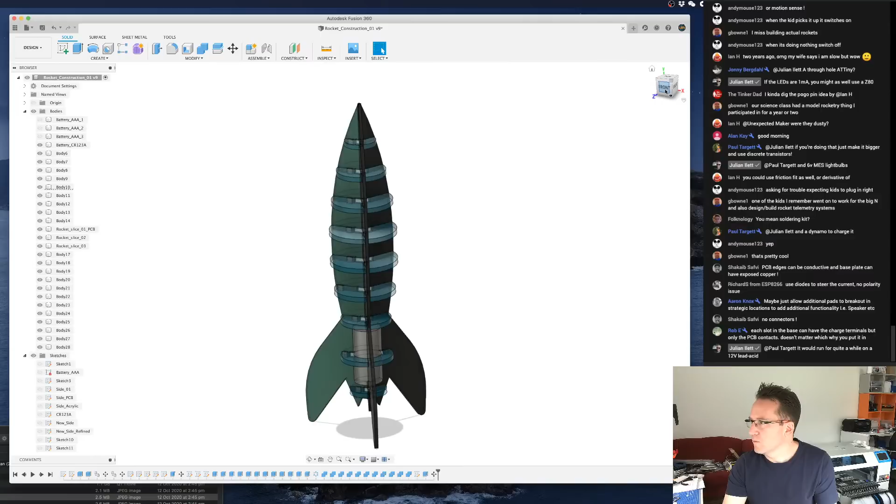There'd need to be a pad on each side, a plus and a minus on each side of the PCB. On this section here is probably what it would... It's going to need a pad here, positive, and a pad on the other side for negative. So when it slots in there's just 2 pogos or something. It could be these type of things, these little SMD pogos. I don't know if you can get singles. And I don't know if slotting a PCB into those 2 next to each other would let it slot.

I guess it could just be a single on one side. When you slot it in, it rotates it into place, maybe. So it could be a bit of a rotation in, which pushes them against each other. If it's 2 pads, you wouldn't need a key. No, if it was 2 pads, there would be 3 ways to slot it in. That's the problem.

So, look from the top, there'd be that way, and that way, and that way, you know what I mean? There are 3 ways you can slot it, and if you slot it where the acrylic goes where the PCB is supposed to go, it won't charge it. So it'd still have to be keyed in such a way that only the PCB edge could go into that somehow. I don't know. Oh, sorry. So it could be like this, but it could also be that way, you know what I mean? 120 degrees each way would be the same thing, but only the PCB one would charge it. No, 2 pads, 1 ring outer to the fins and a raised center to connect.

If you only had 2 active fins and 2 active... what do you mean 2 active fins? Only 1 fin can be chargeable because it's a PCB. The other 2 are just acrylic. They won't do anything. So if they put an acrylic fin in the charge section, nothing will happen.

Yeah, a couple of years ago we spoke about the idea of having it connect from the bottom into a pad, right? It could be like an audio jack sticking up that it plugs into, and then it wouldn't matter. But again, it turns into a really complex build of designing a base to do all that.

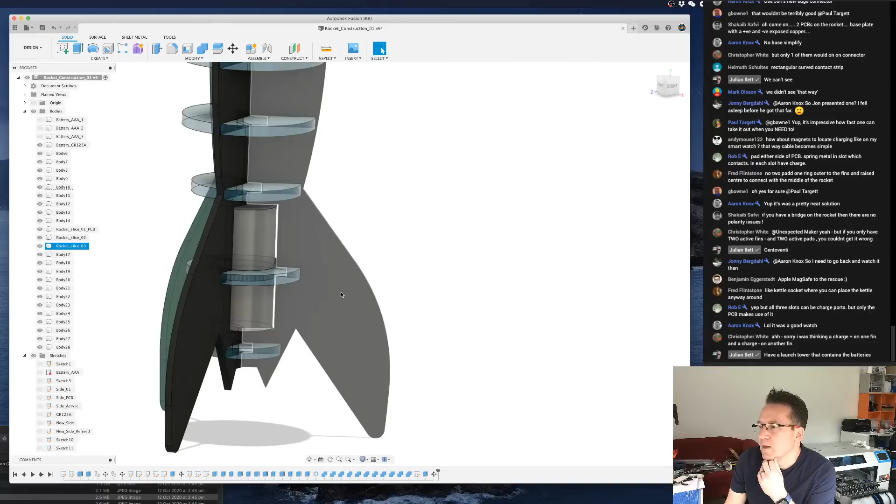Oh, all 3 slots could be charge points. Ooh. Right, well that makes it even more complex again. I mean, complex in terms of building a base, you know what I mean? Like, yeah. Have 3 PCBs on the rocket? Sure. It'll be a very expensive kit if each edge was a PCB. If each slice was a PCB.

Shelve it for a while. Ha ha ha. Really? I don't want to shelve it. I want to build a version of it. It's too cool not to build a version of it. It would depend on how I did the contact in the base. I'd go USB-C to charge it. Cables are fine.

I've not gone Elon Musk at all. It still hasn't taken off.

No, it hasn't yet. Leaf spring battery contacts should be cheap and easy in the base. How? Like, okay, so you got a base with 3 fins. How do I connect them? Where do I put them? How are they connected to the circuitry on the bottom that has the charge circuitry and USB connector and blah, blah, blah?

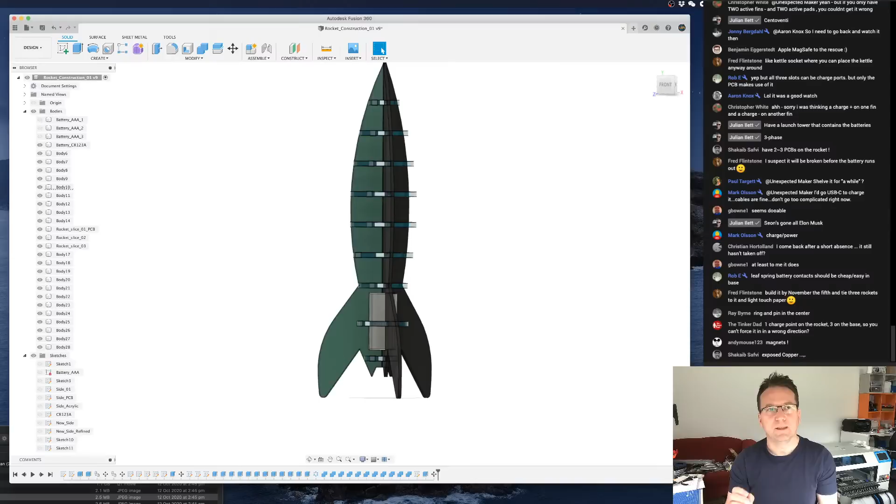Like, who's putting the base together? Does that come as a kit? Does that come as something pre-assembled? Am I going to spend hours putting every base together? Are they going to have to be hand-soldered wires from little... You know what I mean? Like, so... I don't know. Okay. I'm going to switch cameras for this one.

I apologize in advance. I don't mean to be rude in anything I say right now, okay? But everyone's throwing ideas out, which are great, but no one's thinking about manufacturability, repeatability, and how they would ship and how they'd be assembled, right? Sure, there's probably 100 different ways this can be solved. Now remove every single one of them that makes no business sense or no manufacturable sense.

I'm not building a one-off. I want to build a kit that people can buy that they can assemble for themselves or for their kids, right? So, yeah, putting the leaf spring battery connectors, 3 of them on a base on each fin. Who's going to do that work? Who's going to design them, right? Like having to solder little wires everywhere to get it all together? Not manufacturable.

Exposed copper, 3 pad areas, 120. So 3 PCBs? How do I build a base that's got PCBs like this? Shaq, again, like, manufacturing is my problem. Right, but that's why I'm discarding your ideas, just so we know. Magnet cable. You can get magnet connectors. They're really expensive. You're limited on how many connectors. But again, I don't know how that would work.

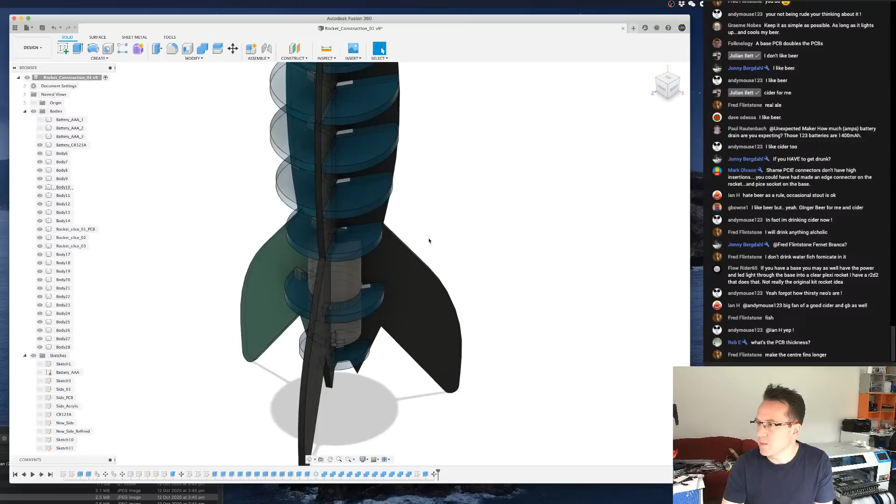The disc light could represent the battery level. Yeah, or there could be a button. You push a button and it shows you the battery level.

Guinness is terrible. Yeah, I can't do stout.

Just put a small piece of copper braid on each side of the fins and use a base PCB. Copper braid on every fin, but 2 of the fins are acrylic. How would you attach the copper braid? And sorry, Chris, but that would look pretty ugly. I mean, my opinion.

Yeah. I mean, right now, the only solution I can really think of for a base that is keyed correctly... Yeah, inductive's not going to work. I don't have enough space on this to put a coil of any decent size that's going to actually charge that way. Why bother with addressable? The issue here isn't addressable or not.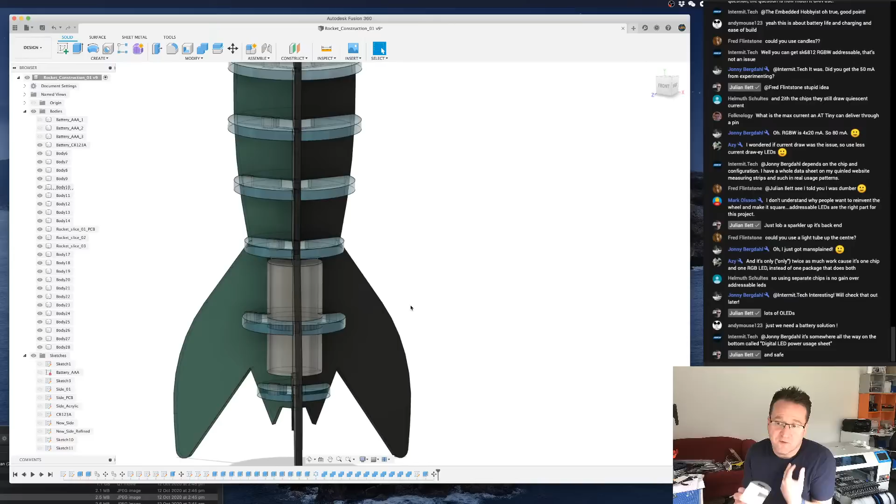So the nice thing about these batteries is you cannot fit any other battery in that. This is the only battery of this shape that I've found online. So there's no accidentally sticking the wrong battery in. Okay, that's one. Two, there are lots of options for a base or for charging. Doesn't have to be a base. DC jack, USB connector of varying types, right?

Yeah, CR2032 stacked won't work. Not enough milliamp hours on them. Can't hold them all together. Messy, expensive. And then if it's going to be a base, we've discussed lots of options for a base. It all comes down to picking the right thing that's easy to assemble, reasonably priced, easy to manufacture, and yeah, they're the things I'm trying to consider.

So I've seen, I don't know where I've seen it. I'm going to draw something. I'm going to switch cameras. So, let me start off with this. If that's the edge of a PCB, right? Like what I think Paul was talking about before, you can get the battery things that they sell. They're metal, and they stick out like that, right? And you solder them on, and it's a battery thing. So the battery would normally go this way.

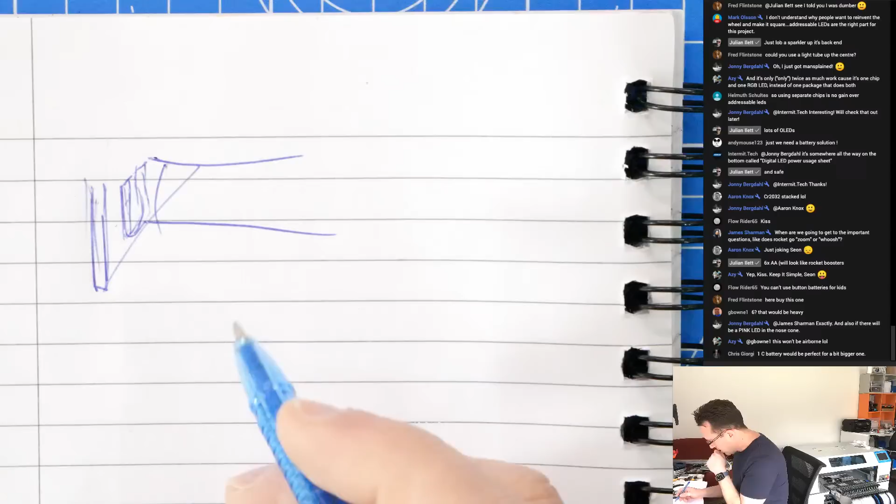Now, I've seen somewhere, maybe Alibaba in my travels, these little things, but instead of pogos, the PCB is like this, and there is a bit of plastic that solders on, and that's got one of those on it. Oh, my drawing is terrible today. So instead of sitting flush on the PCB, it's kind of side mounted, and it's a bit of metal that sticks out. If I can find them, then I can put 1 and 2 back to back here, and the PCB can just slot in. And the key is it has to happen on a flat board.

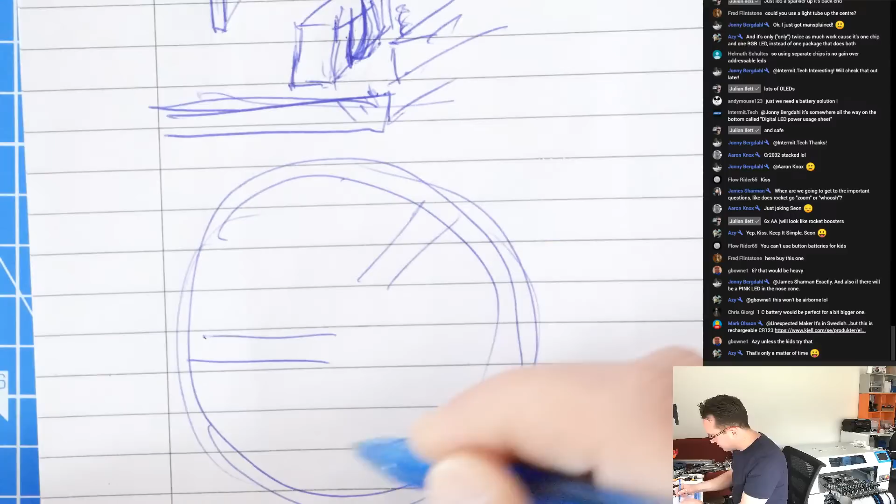And if it happens on a flat board, then I could have a base PCB that has, not slots, I'm just drawing where they'd be. There were the slots for the fins, and there could be one of these things here. If they just SMD solder on, then I could do this, and it doesn't matter which direction you do it. It's a single PCB that slots into a 3D printed base, and then you can just slot the rocket in, doesn't matter which way. Or if I could find a way of keying it, I could get rid of these ones, and it will always fit together in that direction.

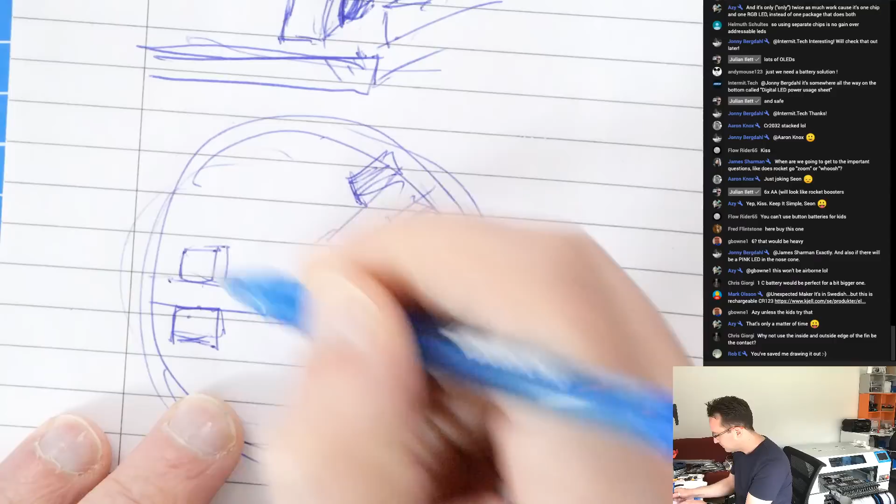Why not use the inside and outside edge? I am talking about using the inside and the outside edge of the fin to be the contact. The fin slots in here. So if the edges of the fin are the contacts, it needs something on the base to touch it. It's got to be spring loaded, something this shape that it slots into. It can't be something like a pogo, because when they slot it in, it's going to push down on it. They're going to eventually break the pins. I don't know if I'd trust something like this.

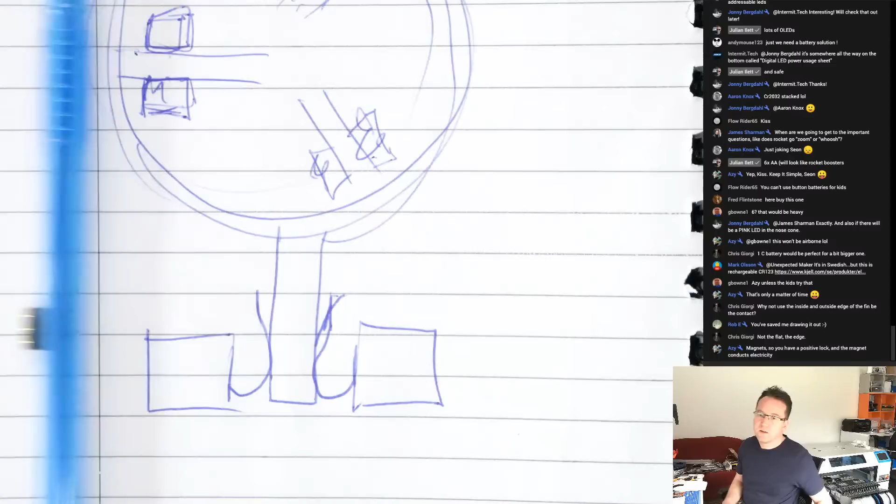Right, magnet connectors are horrifically expensive. Go look them up. They're really limited in what you can get. Yeah, pogo pins won't work. They're too big, too tall. And then, very hard to assemble. Again, need to draw it for me.

Okay, why not use a barrel jack? I don't know what the Tonie box does. But I'm not sure how the barrel jack comes into it. So you'd have the barrel jack on the rocket facing down, and then the actual connector stuck in the base, sticking up. Sure. That's one way of doing it. But if that's the case, I guess it doesn't really need a base. But the problem is barrel jacks are big and take up a lot of space. But look, it's possible.

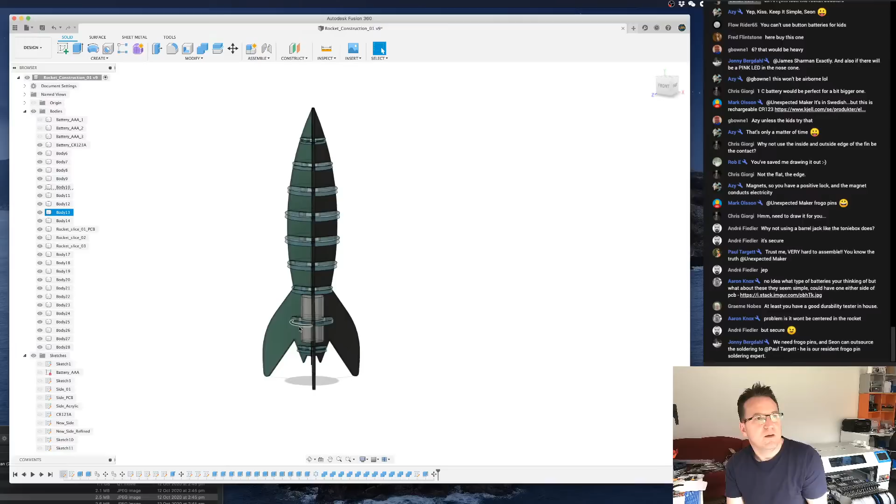Well, it's not secure, because unless they're going to super glue the actual connector for the power source into the base, it might not be that secure. I don't know. No idea what type of batteries you're thinking of. What about one of these? They seem simple.

What happened there?

Sure. Yeah, like I need to source where they come from. The problem with that, though, is they stick out on the bottom. Well, I need them the other way round because they have to hold a 3mm board. So there's no way I could get a 3mm board in between these two. I could get them close enough to each other, right? And if I turn them around to get them close enough, the bit that's sticking out is the wrong direction.

Keystone 590 PCB leaf spring. Okay, let's find out what that is. Let's move this off for the moment.

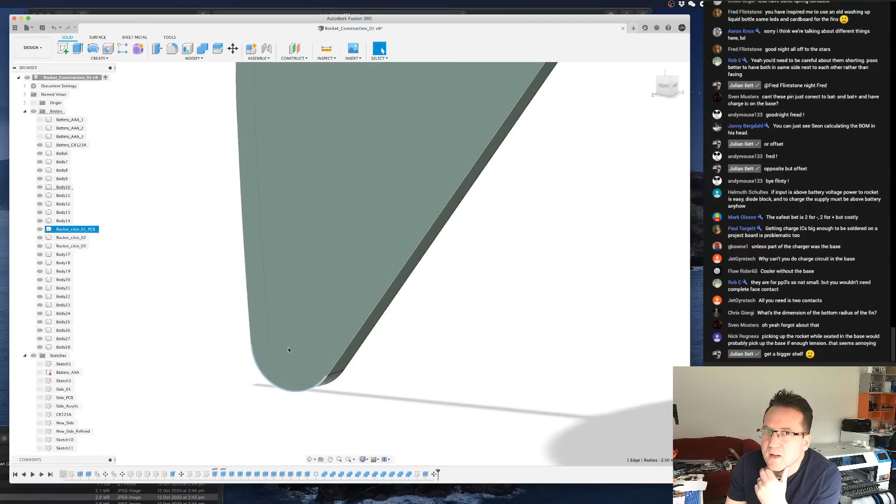I think it's reasonable that when you want to pick up the rocket, you hold the base to pick the rocket out. I mean, I don't think that's necessarily a problem. It depends on how weighted the base is. Get a bigger shelf, yeah. Keep thinking. I think keep it simple.

I can definitely make it run off the CR123 and have that disable when it's on charge and forget about charging, right? That's definitely possible. That's the easiest solution. No charging circuitry, just a FET on the rocket, and if it detects power coming in from the base, it disengages the battery.

Run a small wire down each edge. No, how would someone assemble that? It's acrylic. How would they attach it to the acrylic? What, sticky tape? Blue tack? Yeah, sorry, no offense, Chris, but that's a pretty gnarly solution. Gnarly as in ugly.

Yeah, well, the plan was always battery plus externally powered if you wanted to. The question is whether it's chargeable or not. I wasn't planning on doing chargeable, and everyone's been screaming, charge, charge, charge. Yeah, glue's a terrible kit thing. Hey, here's a kit, but you need to glue all this stuff to it. Yeah. I'd prefer a no glue required solution. No hacky gluing wires to edges, and if you don't get it right, it doesn't charge properly. Yeah.

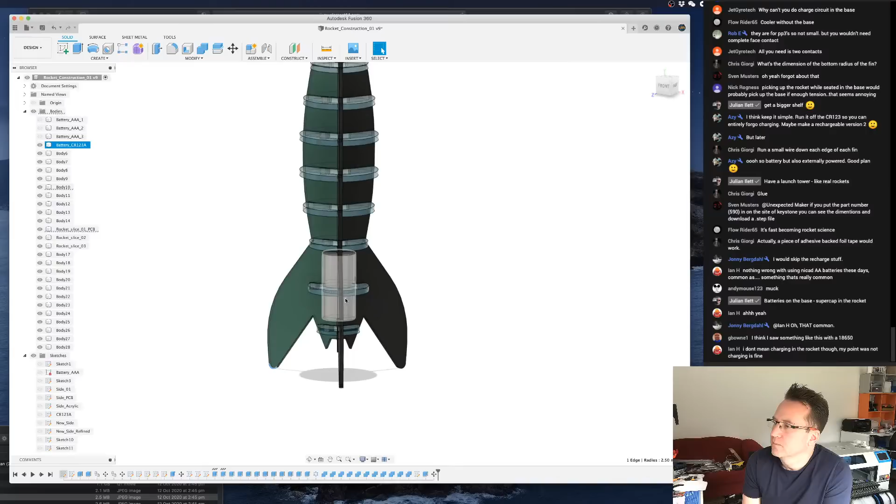I don't mean charging in the rocket though. Oh, right, but then they have to pull the rocket apart to get the batteries in, and then when they want to recharge it, they've got to pull the rocket apart to get the batteries out. I don't know how durable the system would be to be pulled apart all the time like that. And I still might have to find a way of locking those discs, I'm not sure.

I think you grossly underestimate people. Underestimate them how, Jet Gyrotech? I just need one person to do one stupid thing on one of my kits and have themselves or a child get hurt. And yeah. So I think maybe you are underestimating people, Jet Gyrotech.

No, I don't need to forget the whole idea. I just need to not worry about charging. If I don't make it chargeable, it's never going to be a problem, right? I'm not forgetting the whole idea, right? But I'm being very clear on what my concerns are, right? And I'm sorry, but there are people out there that don't read or don't do the right thing or accidentally make mistakes. You know what I mean? So

It was the community that were pushing for rechargeable batteries, not me. Just to be clear, I wasn't looking for a solution for that. We'd already had this conversation back in 2018. Pretty sure I've voiced some of these concerns back then as well. But I'm way more adamant now because I've seen people do some really weird stuff with my products I sell right now, right?

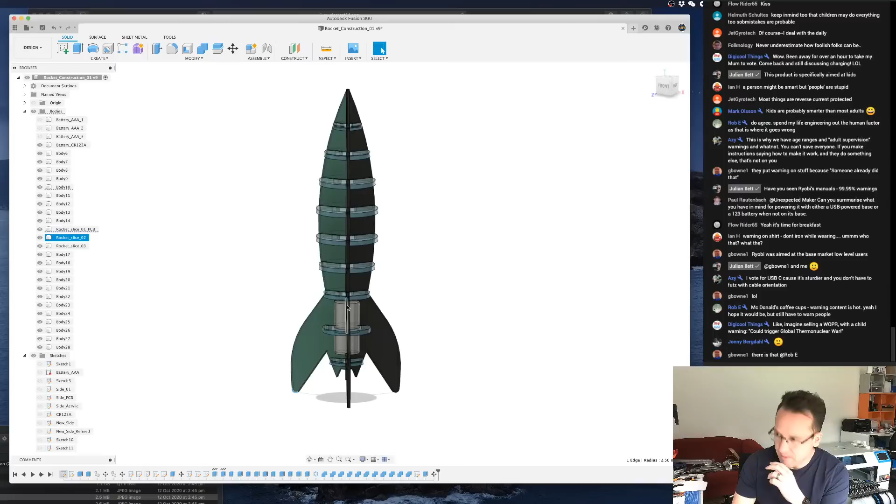Okay, so I'm going to laser cut these pieces. I've got everything I need here to just mock it up, see if it holds together, stick a battery in it, see how it's weighted, see if it falls apart. Maybe next week on my stream, if I get it done by then, I don't know, we can assemble it and have a look and see how well it holds together.

In the meantime, and when I say in the meantime, not between now and next stream, meaning sometime before the end of the world, I'm going to design the PCB, at least the basics.

Please have a look at this. What am I having a look at? I've got hot coffee from McDonald's before, burnt my mouth, burnt my tongue. Totally wasn't expecting it. Yeah. They can definitely do hot stuff. Food? Not really.

But, yeah. So when all this is going to happen, I don't know. Because as I said, my priority now is renovations. So, yeah. But I definitely want to build a version of this. I want to have at least one in my office, right?

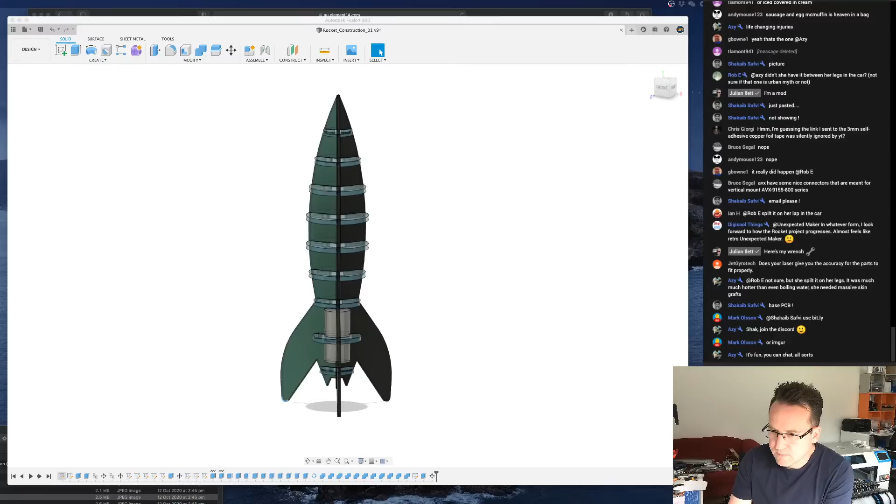But I need to wind this up, folks. I need to go to Bunnings and buy a whole lot of stuff and continue my reno. Yay! You don't get it or you don't like it? I mean, you must get it. It's just chat servers, right? But Bunnings is outside. What? Am I not allowed to go outside? I can go outside. We can go outside. And my Bunnings is within 5 kilometers, so we're good. I'm good. And I've got my Power Pass. Power Pass.

So what channel in the Discord is used for this rocket? That's a really good question. I will make a rocket. I mean, ooh. So actually, Bruce posted in Discord. Hang on. Here's my Discord. Bruce posted these. How do they mount? Right. Yeah, okay. They mount vertically, so they're on the side. Yeah, okay. So that was more the shape that I was drawing, right? They're the ones I've seen.

I think on Alibaba or somewhere. Right? Remember I drew a box with the tab sticking out? So that's those. So that's what I was originally thinking of. And they look much smaller. And they're surface mount. Okay, I'll look at those. In 500s, they're only $1 each for the 2 connectors. Ouch.